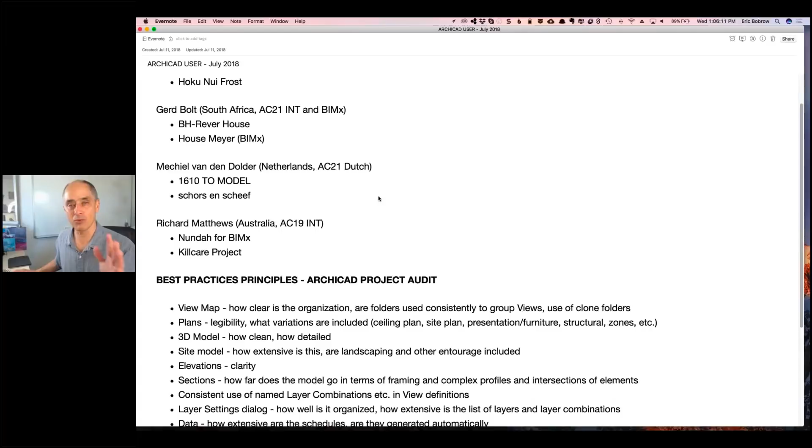Now, as we go through this, and again, I have to just get used to the fact that I'm looking at the camera on one computer because it has a better webcam, but the screen I'm sharing is this other computer here.

So this is just a quick run through of some of the principles that I look for in terms of using ARCHICAD to its best effect. The view map, where you're defining all the different working areas of the project. How clearly is it organized? Are you using folders to consistently group views? Do you use clone folders? Plans, well, that's a very key thing that everyone is looking at, is how legible are they? And to the extent of understanding how far the project has gone, do you have a variety of different views, ceiling plans, site plans, furniture plans, etc. The 3D model, of course, is very interesting to all of us who use ARCHICAD.

How clean is this model? Does it look good? Does it really represent the design well? How detailed is it? Is there a site?

Now, not every project needs a site. Some of them are really in an urban context where you don't need a whole lot of site information. Others, the site is a critical part of the design - it's a very steep hillside. Is there landscaping? Well, it isn't necessary, but it certainly is helpful to understand the context and to help the client participate in the design.

Sometimes the site is also important for getting approvals and showing things to neighborhood groups or for authorities to review.

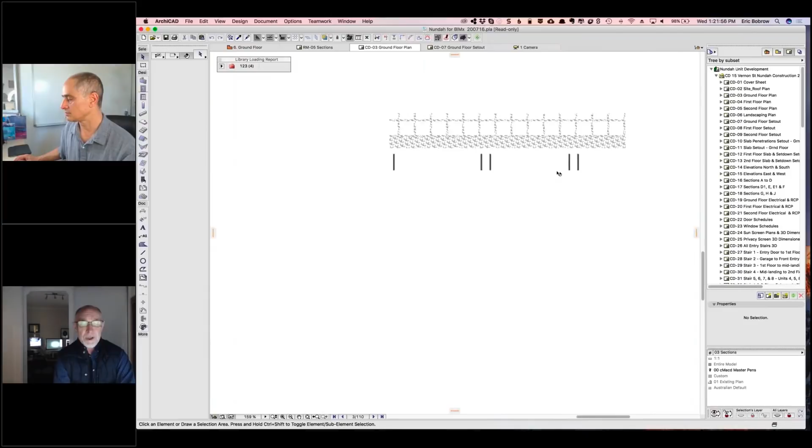This was an interesting project because my developer friend, for whom I do a lot of projects, decided he would like to try to build it with a new system called Ritek, which is a double skinned FC panel strapped together by metal bars, small bars. Those are pre-cut and then core filled on site, dropped into a slot, braced, core filled with concrete. You'll see on that image there, for instance, that there are corner pieces which then lock the walls together.

One of the things I've probably mentioned is I always design and draw in, or produce, color drawings. In this instance, it was very useful because you'll notice there's a legend which shows that different wall types, different thicknesses, will have a different color code. Let's see where that legend is. I'm just going to zoom out.

So the legend, up in this corner here. Quick question - was this legend drawn using the 3D elements just off to the side? Well, of course not, because you don't want those showing up. Those would have been converted to 2D lines and fills, etc. It could even have been a separate worksheet I might have plunked down on the drawings, but that's okay. In this case, I went down to the actual plan, the ground floor. Of course, if you wanted to, you could crop this out when you place it onto the sheet. In this case, it doesn't matter.

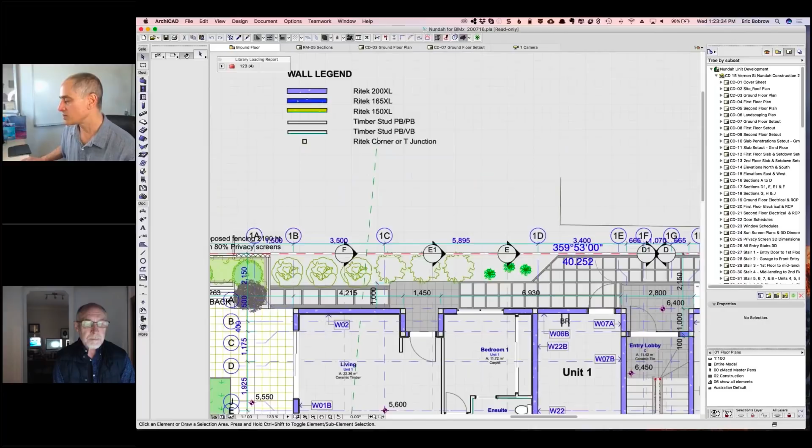Now, as you said, this is a line. This is a group which would, I guess, probably include... so that's the text. Oh, interesting - your text extends over here, but if I hit the tab key, this is a fill. So you basically exploded the wall into just graphics. That's right. Excellent, so this communicates well.

Let's take a look in 3D just so we get a quick sense of that. Now I noticed that you have a folder for 3D views here that are based on camera positions. So one of the nice things about basing views on camera positions is that you can do a fly through, either flying from one to another position, or you can batch process a number of individual camera positions. Now, one limitation is that I don't think you can rename it here in the view map - originally it would come from a particular camera position that's in the project map.

But let's just take a look. So we've got looks like a 3-story building. So this is one of the complications on this site - the fact that we needed to have clearance in that garage for garbage trucks that backed in. In reality, it turns out we didn't really need to have that. So this has got a folded slab, which is another complication we shouldn't really have dealt with when we started dealing with Ritek walls, but that was an interesting exercise to deal with.

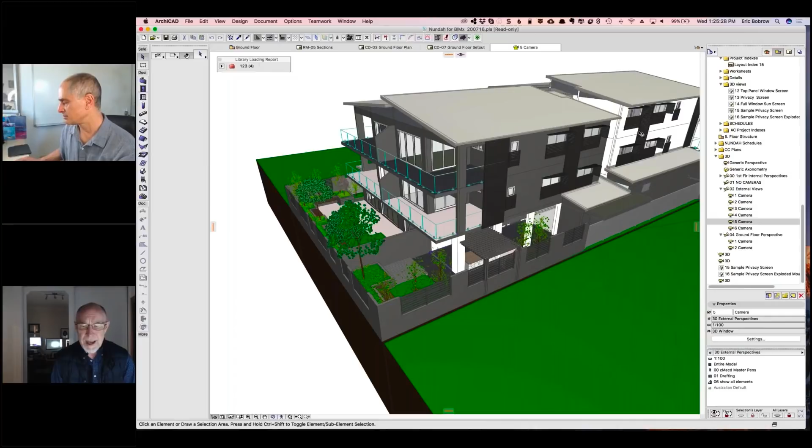What do you mean by a folded slab? Well, if you took a look at one of the sections, the A section probably would be the... Okay, no sorry, it's been a while since I've dealt with this project, so try an E section. So I see some things going on here. Yeah, sorry - G.

Oh, it's interesting - so this one, the last time you opened it, you had it off in a separate window. Do you use 2 screens, or how do you? I've got actually 3 screens. All right, so for my purposes, I'm just going to take this - let's see, go to the window menu and say that I'd like to dock it, so it will then put it back into the tabs here. Just be a little bit easier for my purpose here.

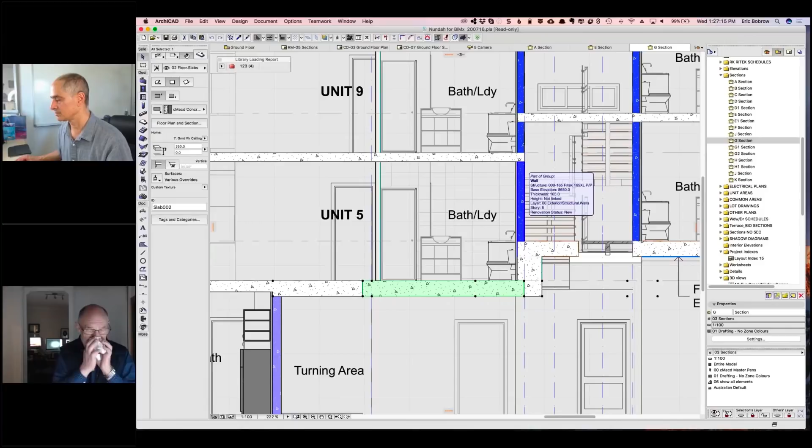All right, so here you're talking about the fact that it's a split level here. Split level, yes. Okay, so you were calling it a folded slab? Well, that's a fairly complicated fold because it's not just straight through - in the section of the entryway it actually wraps around that entryway. So that created the complication of having these walls. You can see the blue walls are different sections, so they all had to be pre-cut and specific sizes. So, fairly complex.

Have you got the... if you go down to, just a second, have you got the Ritek shop drawing review open that I sent you? I'm sorry, where was that? I'm not sure - that was a PDF that I sent through, which would be good if you could open that, because that relates directly to... was that a PDF or what? PDF, yes. Okay, so let me see if I can find that.

So, here we go here. Ritek shop drawing review PDF, which you perhaps - that's the last email I sent this morning. You scroll down, you should... oh, I don't see. Keep going. That's the last one here that I'm seeing. So, right, well it was in the second email I sent you. Okay, Nundah final web zip and Patricia Place Killcare PDF.

So now let's see if you sent it separately. So no, it would have been attached to the file. So I don't see that. All right, so we're going to have to go without that. You mentioned it, but I don't see it attached. You can't share my screen for that. Yeah, we could have you - it might be complicated, don't worry. Okay.

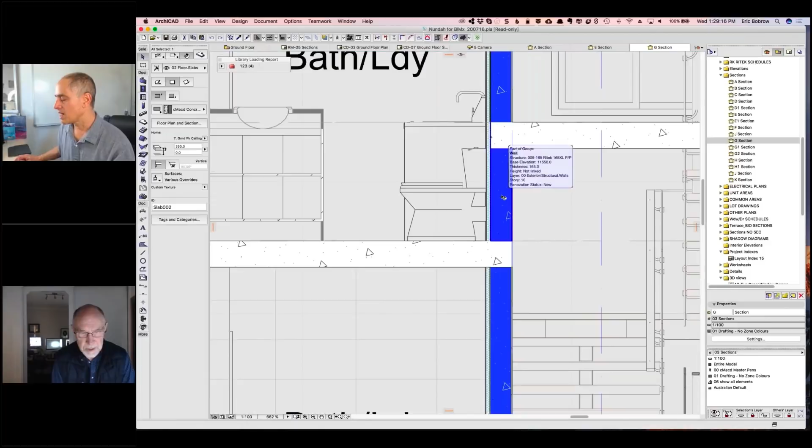Anyways, yes, because all those chunks of wall had to be pre-cut. Some of them couldn't quite match. That's what the PDF shows, how those shapes are. I had to match them all, send them off, and then they check them off.

One question I have structurally here: the slabs are inserted, and visually they're interrupting the verticals there. Is that the way this is actually done, where you have a small piece of wall, and so even though this appears to be a single wall, it's actually made up of two separate pieces? Yes, that's correct. It's set in place, filled up, and then the next slab is poured on top of that.

Okay, interesting. So in terms of design, what was the most interesting part of this project for you? You mentioned some things about working at the split level. What else was interesting in terms of what you had to figure out? Well, it was how to best shape those walls, I guess.

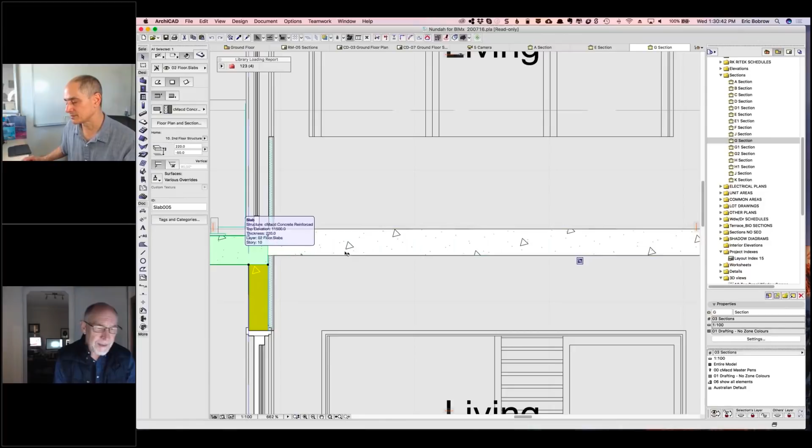Here's another interesting one where we've got just a slight offset there. Yes, and you'll notice some of those walls also - I don't know why that one's not working correctly - but these are composite walls, and in this case you can see how the insulation part of the composite runs up past the end of the slab there.

So all of this was done with SEOs, solid element operations, and I was making sure that all the materials in this are actually represented accurately. Okay, so this 3D model here is quite accurate.

Now I'd like to look at this particular part because, as you mentioned, you did solid element operations, and some of the things you do in solid element operations have to be done that way. Others can be done with just complex intersections, with building materials taking precedence. Let's take a look at this particular area because it's a subtle thing.

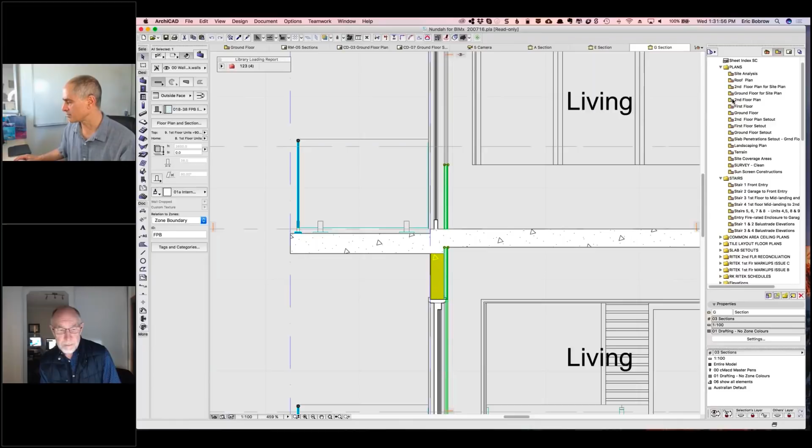And so where would that be on the plan? I want to do a marquee around it. Oh, that's a front, it's a rear. So which story would it be? Which story should I go to for looking at it? Sorry, you want to - well, it doesn't really matter if you're going to do a section. Are you going to do a marquee section?

That's at the rear of the building. All right, so I'll just go down to the first floor here, so there. By the way, there are all those cameras that you defined and are showing up.

So I don't know which is the front and which is the rear. I guess your left-hand side is the rear. Okay, so would it be somewhere in here? I'm trying to see your cursor. Yeah, so if you went above G and went down through H, below H or something, did a marquee. Bold. Yeah. Yep.

All right, so we're going to take a look at just that slice there. All right, so there's exactly what we're seeing in the section. Isn't that great? I'm not being facetious - it's just when people tell me it's too much work to get the sections looking right from the model, I say you just have to understand how to fit pieces together.

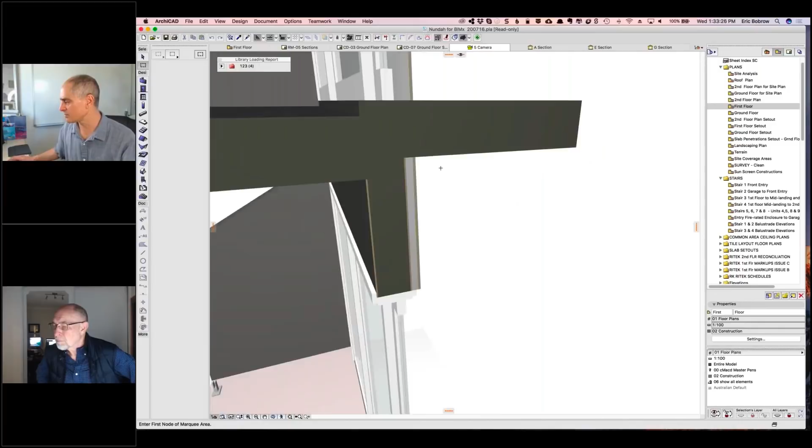So let's change one setting here, which is right now we're seeing the edges all in gray. That's where I'm cutting with the marquee. If I go to the view menu, 3D view options, elements in 3D view, filter and cut elements in 3D - this is sort of non-intuitive in the sense of how would I change that gray. Well, it has to do with how I'm looking at the cut elements in a marquee.

And it says use element attributes here. That's interesting. So why is that gray? Because it should really - well, are we missing the texture? Yeah, probably, that would be it. And in fact, all right.

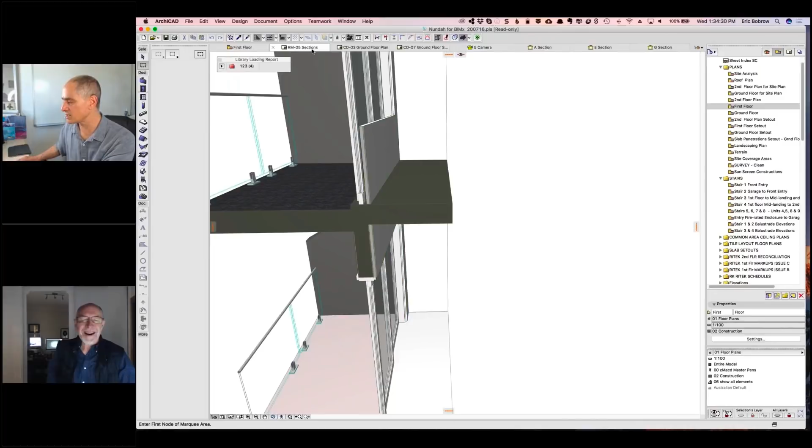Now let's just talk a little bit about this. You've got a piece of it, a wall that's going up. Yeah, I don't know why that's not cutting there, because that's not the way I left it. You must have been messing around with my model, Eric. I haven't messed around with your model, but let's look at that section here. Oh, I remember that - for the section, which one was it? It was the G section here.

Yeah, so in fact, here's... yes, interesting. Okay, so there is a little mistake, or something that went bonkers in your model. Maybe it happened before you sent it, because I haven't been modifying the model.

Well, like I said, this is on an older disk, like a backup disk off on my other server. So I had to make sure I relinked all of the library items, although that shouldn't really make any difference. I always worry a bit when I'm reassigning using the drawing manager all of the linked view maps and PDFs that I use. That could happen in that, although that seems a bit odd because it really shouldn't be cutting it.

Yeah, and it's interesting that all of a sudden it's recalculating this here. Now, the point I was making, aside from the fact that this should have been trimmed off most likely, is that you were doing this in two separate walls. You had the wall, it looks like just the surface with the insulation.

Oh yes, and that is because the RITEK wall needs to be a particular color and identified, but the internals of every wall could be different. So that may be a 150 mil RITEK wall, but the internal surface in that instance is insulated, whereas in another instance it could just be Villaboard on the interior. So you have a different... so yes, I've actually got double walls there.

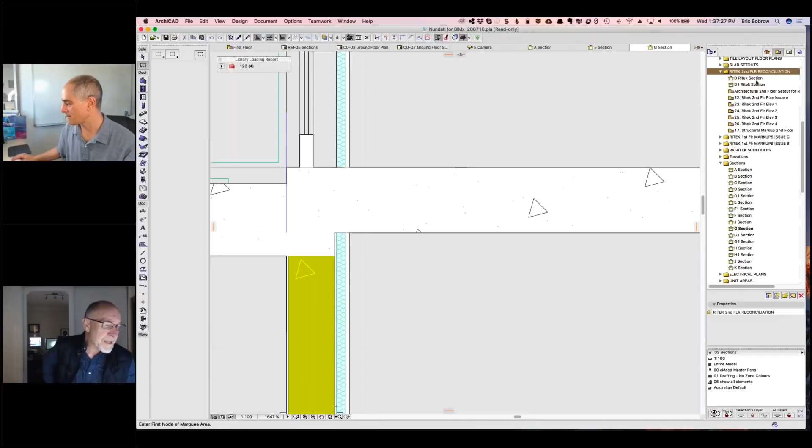Right, okay. So then if you go down to in the view map to RITEK second floor reconciliation, about just past the stairs - well, RITEK first floor markups, second floor reconciliation. Have you got that there in the view maps? Right, second floor reconciliation, all right, there we go. Just go to the D section - which one, the RITEK, D RITEK section. Okay, we'll do that.

Oh, interesting. Well, this is a whole different view, seeing the... so that's cut through the entryway. So you'll notice that all those labels actually label the specific cut of the wall that RITEK would have to supply. Now they don't show there because, of course, being a common material, the joints don't show. I've got somewhere else I might have...

Okay, so here is a piece, and we've got this label F07B, and there it is. So basically, in terms of BIM and data, you have this element with the designation, and the label is coming from that. So if I were to select the label here, when I hovered over it and went to pre-select it, it's indicating that it's attached to that element.

And what is it if I double click on it? Whoops, if I go - yeah, that's really, it's not as sophisticated. I would have done this like Tim Ball does it with the newer versions of ARCHICAD, but we didn't have that function there. So that is, but that is still an ID - okay, so the ID attached to the wall.

Yeah, so just as a point for future reference for everyone, and Rich, you're well aware of this, we can now make labels have automatic referencing to a variety of data from the element. So we can say this label is associated to that element, which Rich already had, but instead of it being just pure text, which then has to be manually coordinated, it can pick up the information from this element.

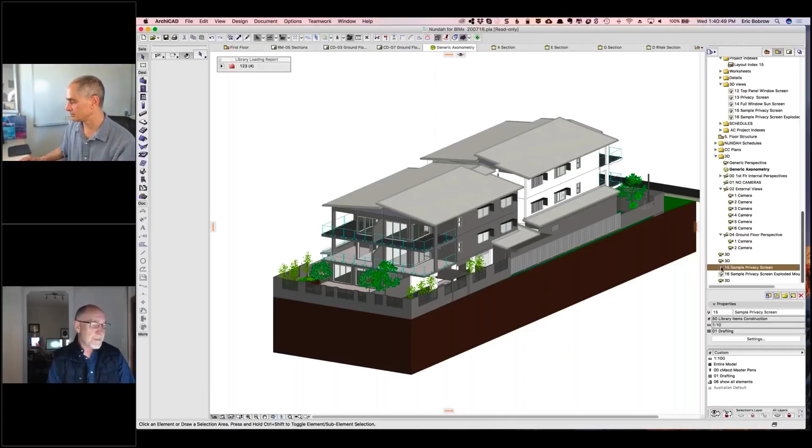Is this what you're referring to here? Well, it'd probably be better if we went to the layout, about halfway down, CD24. Wait, layout... CD24. Okay, CD24, yeah.

So these are custom sunscreens, the actual profiles for the edges and the pieces that go in there. So that's how I laid those up, so they're actually 3D.

So if I open the source view, let's take a look. This is a source view. If I select any element, it's a slab here. Now, for those of you less familiar with this part of ARCHICAD, we are in a view that's based on the 3D - it's called a 3D document view. That means we can put in text and labels in here, but these elements came directly from the model.

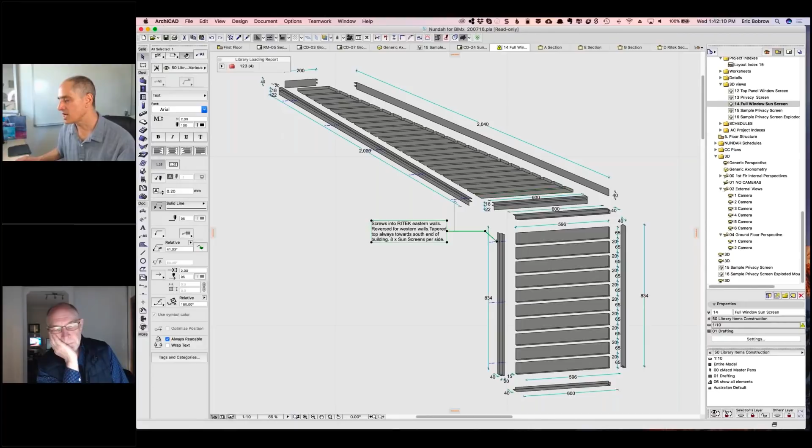Now this is a view where we can say open the 3D source, because right now we can't rotate around - we can only zoom in and out and possibly annotate it. If I say open 3D source, now we're in a live 3D view which has those elements.

And of course, you've set it up with a particular layer combination - is that what you did to isolate it? I would have done it, yes. Can't remember now, but I always, when I create my library parts, I have them on a library part layer. But this probably I would have had specifically, because I don't want this showing up in the rest of the drawing, so those library parts are switched off. In this instance I probably had a special layer for grouping these.

So I can see that in terms of your layer structure, you've got a layer combination that's active: library items construction. That turns off almost everything except for a few special layers at the bottom. So basically you're isolating your work at that particular time when you want to construct library parts, or in this case, annotate a special view with this layer combination.

And while you're there, it's worth mentioning my layering system, which started way back when - I particularly like it because it groups everything. It's a redundant system in that all the fills are together, all the lines are together, markers, etc. One thing that used to really bug me was that walls were usually at the bottom of the list, and in the old days your scrolling was pretty slow, so you always had to go to the bottom. Or if you said exterior walls, interior walls, they weren't necessarily next to each other in the list.

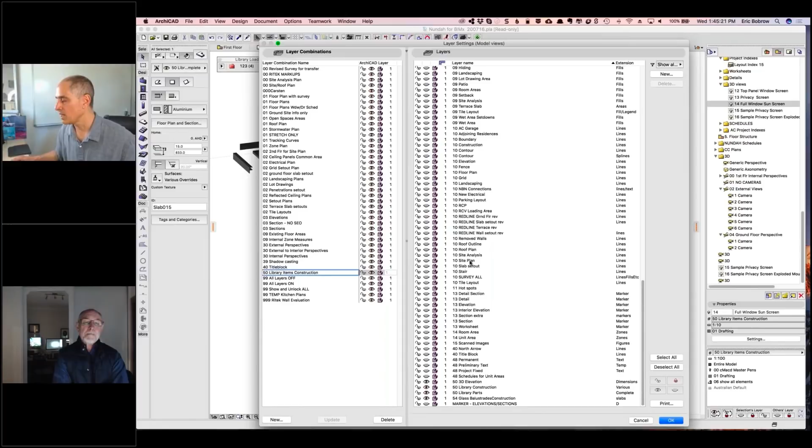I'll just point this out as a general comment. One thing I like is that you've thought this through for your needs, rather than just accepting what Graphisoft does out of the box. You've got things that relate to actual plans, like floor plans or electrical plans, but also things like library items construction and temporary kitchen plan. You're using this flexibly and deliberately to organize things and know where they are. I like that you've grouped the walls, slabs, etc. in a sensible order, with the annotation in a separate area.

Now, when I click on something like floor plans here, I'm seeing that things like stairs and objects, electrical things are turned off. Now, you don't have them locked. Are you aware that if you lock the layers that are hidden, you can hide them from the list?

Well, probably I hadn't thought about that, Eric. Okay, that's probably a good point.

I guess sometimes, though, you might be in the floor plans, but want to have a quick look at the electrical. Then I just go in and switch it on temporarily, so if I go in and out I don't have to worry about it. Because of my organization, I can quickly go to some place. I usually lock the boundary lines and a few other things that should stay locked that I don't want ever shifted. But if I'm in the drawing and select an individual element to change its layer, I want to make sure that layer is available. So I tend not to lock them and make them disappear, because that can be an issue.

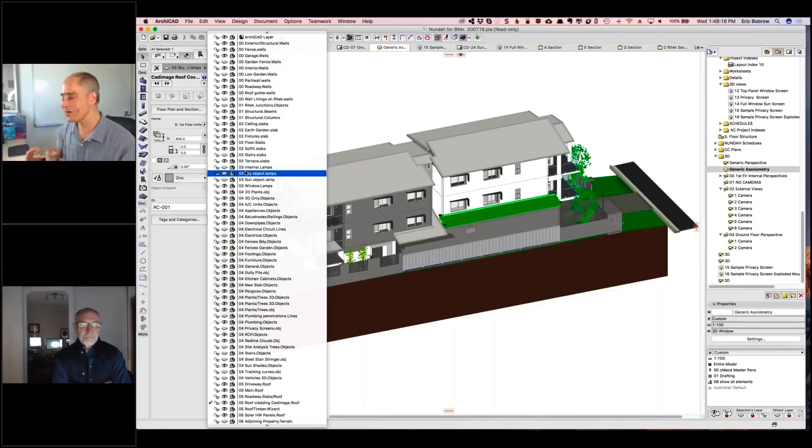There should be a... no. There's actually an entry in the view map. There's a stair folder, so we're in the view map. I think it's higher up - stair. Okay, so look at stair. So if we select it, we've got a slab here.

We've got a supporting piece that's also made with the slab tool, trimmed to this, and this element here is the center. It's interesting - I selected it and it's a slab. How did you get a slab that goes like this?

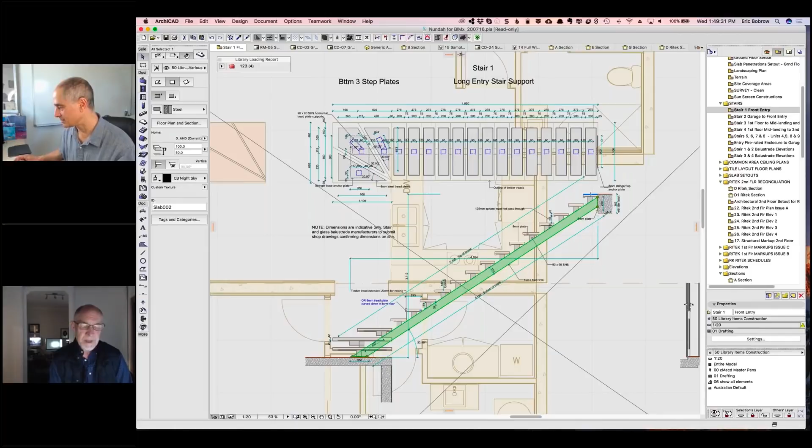Well, you've got to be clever. No, you're actually looking at how all of this is constructed lying down. So you're drawing essentially the profile of all these elements perpendicular to the floor plan, and then you save this as a library part, or turn it into a morph - what do you do? I look at it as an elevation from the top, and that converts it into the correct orientation.

So for instance, if I look at this here - I'm going to do this because this is an interesting approach. All right, so this is what we were looking at, and this element here is a slab. Why is that? Because this is just lying on its side, like a tilt-up type of process. Interesting.

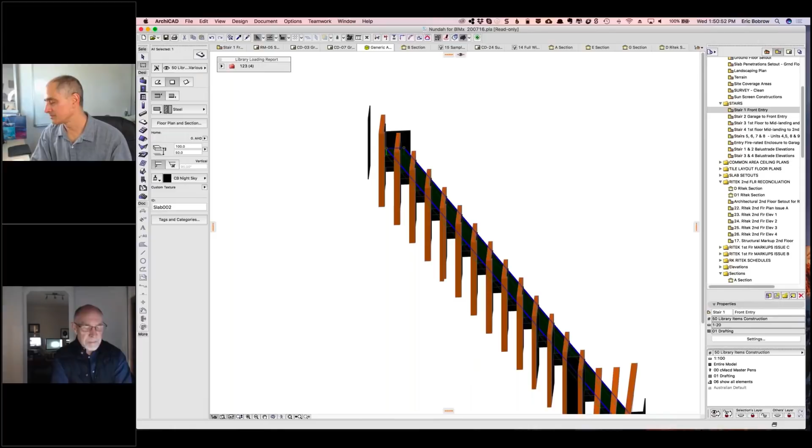So that's an interesting way to do it - you combine all of these and save them as a library part, rotated. If you imagine that first view as being a floor plan, you look at the north elevation - that's what I look at when I ask it to go to 3D. Then I save that as a library part, and all those parts and pieces are in their correct position. It's a lot easier working with that, particularly when you're looking at slopes, than trying to work in a real true 3D sense, because you can very accurately lay everything out.

Todd Hotchkiss asks where the project is located, and if it's in a hot climate. It is - it's in Brisbane, in Queensland. So hence you'll see the extra insulation. ARCHICAD gives a certain value, but because it's concrete FC paneling...

Can you go to the layout and do the cover shot? I'd just like to see - that's probably a better cover sheet.

No, that's not - I do have a final photograph of that, but that just shows the textures a bit better though. I tend not to get too...

It depends on the project, but this project has been finished and looks pretty good in reality.

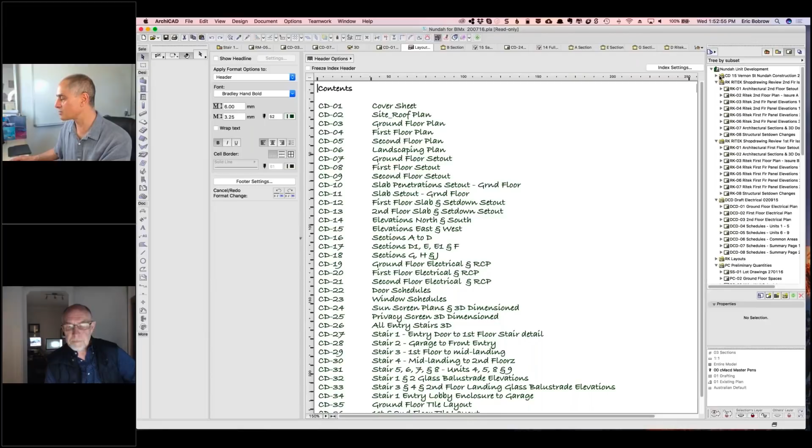Now a quick question - this drawing is your list of sheets, so that's an index? If I open that up, is this an index? Okay, which is perfect. So basically that's a list, and you're saying the subset is this particular one, as opposed to having more sheets in here. So this is the CD set - you're not including the RITEK set, etc. Not including the RITEK and the draft and all the rest yet.

Okay, just so that is of interest for those of you watching - you can have indexes that list different groups of drawings, like just your structural drawings, or you can have them list the entire layout book. But if you want to be specific, you can choose one or more subsets and say, I only want to list those particular sets.

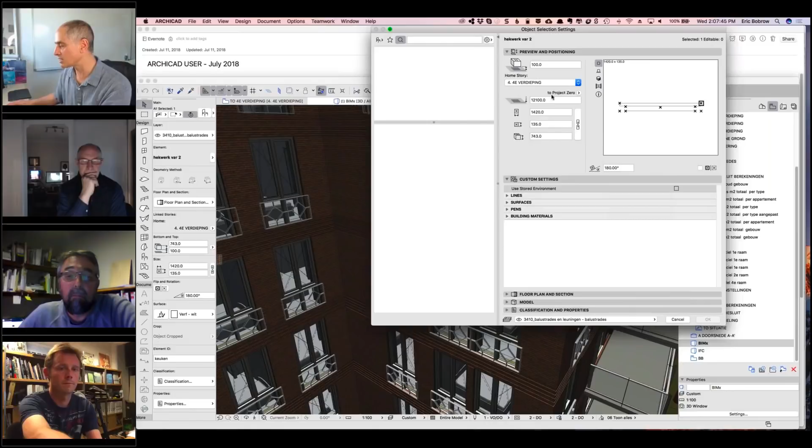So I'm going to ask - did you create this with just some slabs that you drew, or thin walls on the floor plan? How did you create that? That's one quick question there.

Now if I select the wall here - this is an interesting thing, I'm just looking at it structurally. The wall we can see has all of these bump outs. If I go in and say edit selected composite or profile, we can see that it is a complex profile, and it does have all of this shape here. So we have these individual components that are uniform down here, and then we have the detail there - that's just interesting to see how that's being done in terms of level of detail.

Going to look now. Dave says maybe the microphone is plugged in wrong.

One thing, Mechiel - you had mentioned that you had a computer with a microphone or webcam separate from your normal working computer where you could have the project open. Do you happen to have a microphone on that other computer even though you don't have a webcam? If that's the case, you could potentially connect up on the other computer using the same link.

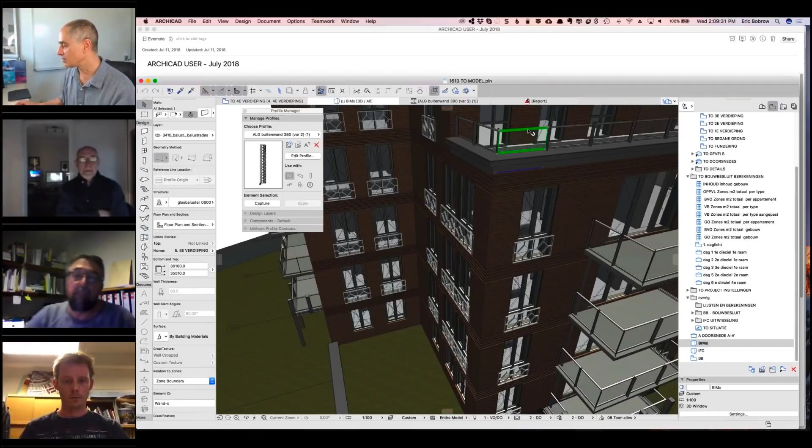All right, but I'm looking here - so what is this element? This element that we're looking at, in terms of the railing, is a wall. Let's just see what this is - it is a complex profile, made of, I presume, some metal and some glass. Just in terms of looking at how things are being constructed.

Now here's an interesting thing just in terms of the modeling. We have what looks like - and I'll just zoom out a little bit.

Certainly it looks like a slab, but it's actually a piece of wall wrapped around here. So you're doing a lot of things with complex profiles, which is great to see.

So we can see, I just heard something. Was that maybe Richard? No, I'm sorry, I coughed. Okay.

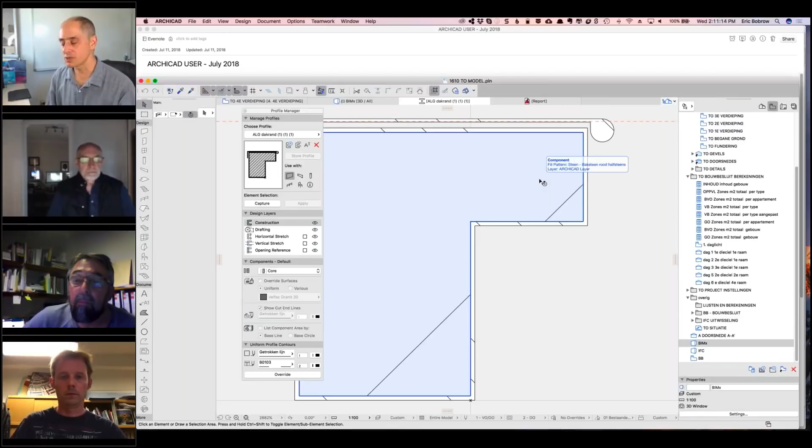So Mechiel, I'm not hearing anything there. It's interesting, I'm seeing it indicate that you're talking, but there must be something going on. Whenever you're typing, I'm seeing something. This is very odd because it shows on my screen that you're talking, Mechiel, but I can't hear anything. It's like your microphone is defective, but I don't know what it is. All right, so we'll just look at a few more things. Perhaps we can have you on another session where we can work out the technical details ahead of time.

So the main thing I'm finding interesting just at first glance at your project, and really it is just limited to what jumps out at me, is your creative use of complex profiles here.

So we've got this entire piece here that wraps around, and it's actually got a gap in there. I'm not sure how that is actually constructed with the gap. But if we go back to that 3D view and zoom in on it, so we can see the shape.

Now it's interesting and nice that ARCHICAD is actually cleaning these two up nicely, and it's interesting that instead of making a diagonal, it's actually sort of chopping this out, and yet we are getting a nice clean edge. There is a little bit of a line there.

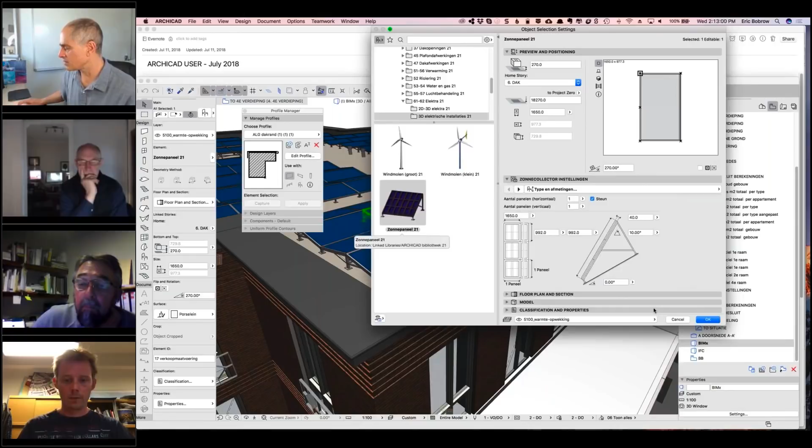Let's just see if there's anything else that jumps out from a modeling perspective. So we have some, I presume these are solar panels on the roof, and this is an object that we can see in 3D if we look here. Okay, so this is a standard library part, or a sophisticated library part, that you're putting in. So you're using a standard part and of course arraying it.

That's good. Let's just take a look at your layout book here. And by the way, Nathaniel asks, is Mechiel muted by the operator?

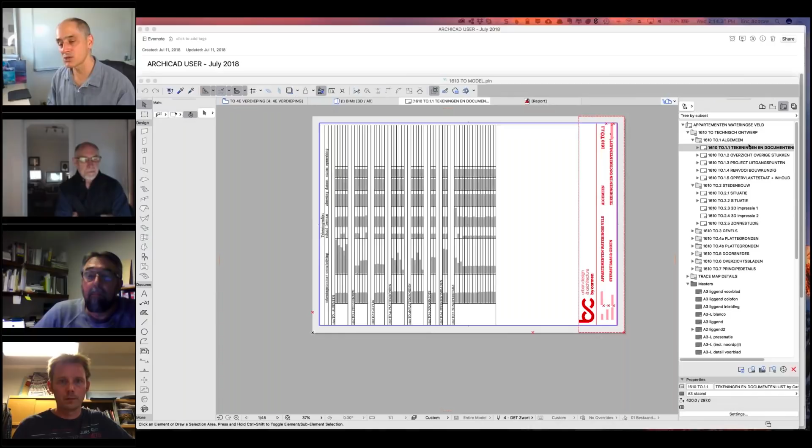No, I am not. I can mute people, but in this case their microphone is showing as active. Don is asking, is the recording computer controlling the volume? No, I didn't do anything separately there. Dwayne says, I see that attendee 24 is talking, but not hearing anything either. Vic says, try muting Richard to see. I will do that, but I don't think that's going to make a difference. All right, so Richard is now muted. Mechiel, go ahead and try talking. Yeah, it's not coming through. So, all right, all of the guesses, I appreciate you all attempting to help, but unfortunately they're not working. And I do keep hearing little blips, like there was a defective microphone there. That's all I can guess at.

All right, so if I go in here, what are we looking at on this page here? Oh, this is interesting. So now this is sideways. Are you printing out your sheets differently? Okay, so we do have some sheets that are one orientation, some that are a different one.

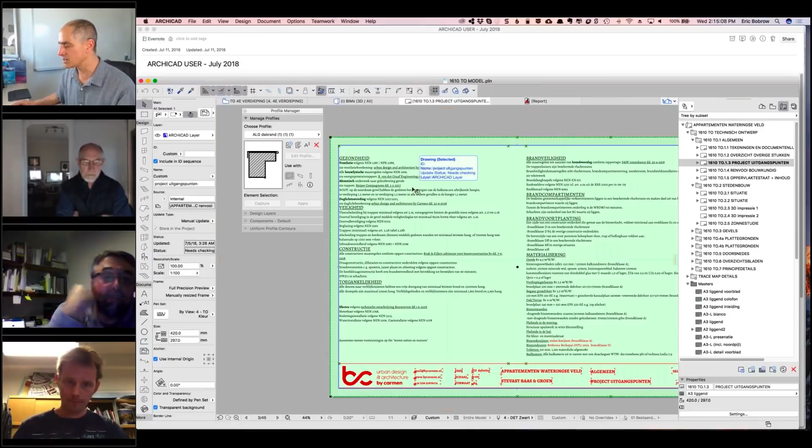Now, I'm always interested in seeing, so this is a drawing on a sheet. And when I open the source view, how much is it manual versus anything else? If I select this, this is just some plain text. So you've got this here, a block of text.

Now it's interesting, we've got all of these guidelines. Let me just remove all guidelines there. That cleans up our view. But I can see that each one of these is a plain text element. Now there's nothing wrong with that at all, but it is certainly possible that these could be put together, even though they're different formats. One of the things I know in the past with ARCHICAD, for people who came from a long time ago, is that you might have to put things in different blocks in order to get different formatting. Or if this was coming from another program and you're copying and pasting, it might come in different pieces. But right now, I don't quite see why these are separated.

Let's just look at a couple other things. I'm going to jump to the next group of views here. Okay, so we do have site information. The question is, this is a drawing—if I open the source view, what are we seeing?

So we are on a plan view. We're seeing the building with a simplified view, which makes sense because it's reduced in size. That's done by the model view options here. So we have a model view for a site at 1 to 500 scale, which would be, in the US, about 1 inch equals 40 feet or so.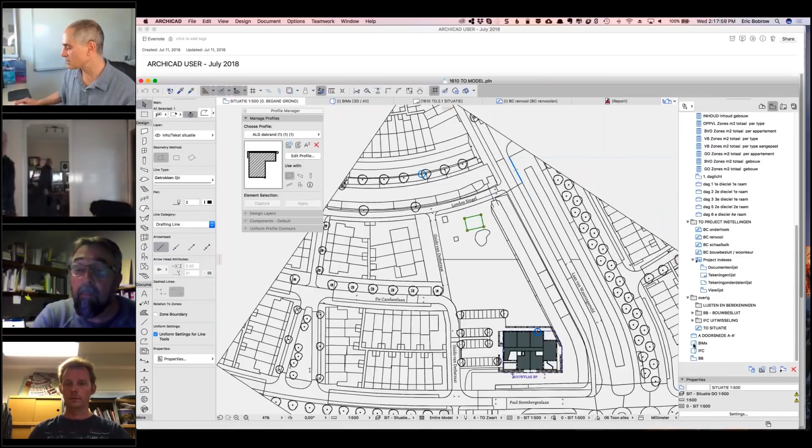If we go back to that BIMX view, so we are seeing then—I'm just waiting for it to refresh—so we're seeing a very simplified site here, whereas on the sheet we've got a lot more data.

So one thing I'll ask you, Mechiel, is did you consider doing any more context in the site in 3D, or was it really just not necessary? This was just the only thing that was necessary was the 2D information—pure text, so DWG, things that came from DWG, and just 2D.

All right, so now I know where you've been typing, because it's not showing up in the questions area, it's showing up in the chat section. All right, so I think probably we'll call it here, unless there's something else you think would be particularly of interest to our viewers.

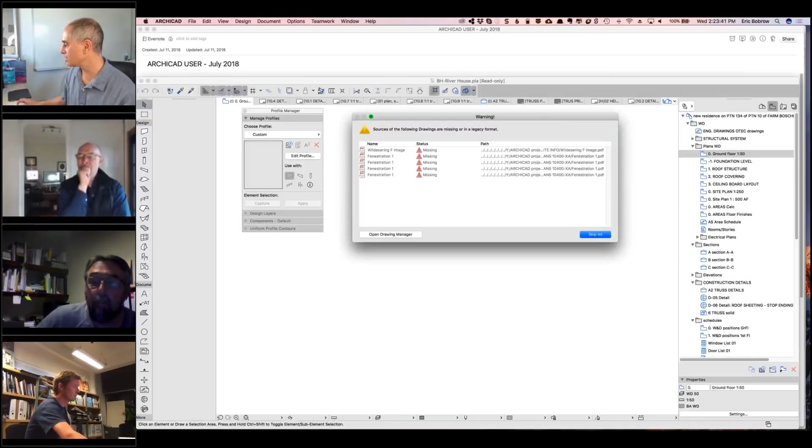All right, so Eric Lutz says 22 is working well. Ken Andrews says, I've started with 22 and it seems very good so far. Some people are saying not yet. Gerald Hoffman seems to be quite good. Bob Schwenke says, I've jumped on it immediately, having some issues with old versions of ARCHICAD. I'm not sure what you mean - trying to open old files with old versions, or you're talking about old files. And Joe says, we don't have 22 in New Zealand yet. Okay, all right, let's skip this here.

I'm going to bring up - Gerd did write some extensive notes in the email, so we can at least refer to them in terms of just knowing about the project here.

The project is off-grid, energy efficient, and constructed within the guidelines of a UNESCO biosphere-controlled natural environment. It floats above the dense bush - he's in South Africa. It overlooks a savanna area and a small stream, hence it's called the River House. The owner is also the first-time contractor and has a small, low-skilled workforce, and BIMX has been a morale boost among the local workforce - they can see and manipulate the views of just about everything they're building, so that's really helped.

Project notes, which you sent separately, have some interesting descriptions of the structure. The model is complete, the layout book has everything, and the BIMX hypermodel is also included. You're working on your own in South Africa - you're sort of in a somewhat isolated, lonely mission here.

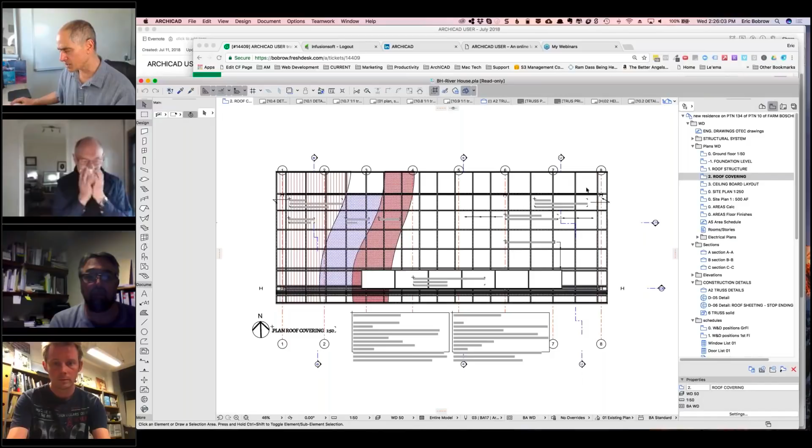So let's take a look then at the River House, and some missing parts, I think - favorites. So we are missing a couple of little things, I think we can probably just ignore that. And if we go up from one story to another, we can see you've got stories here: foundation level, roof structure. So it looks like you're separating out different stories for different uses, say for roofs - obviously this isn't a story per se, it's just a level or organization that can have some issues there.

Ceiling board layout - but maybe, of course, this might just be one level. Let's just take a look in 3D so we can understand this. So in terms of general BIM organization or ARCHICAD organization, I just zoomed out to fit in window here. Or when we have these views here, this is something, a suggestion for Gerd and for others.

You can go in and rename them. So in other words, if I double click on this view, it was a close-up, so I could just call this close-up of front. I don't know where it is, whether it's a front or not, but now it's easier to know what's the difference between that and this 3D view, which is a perspective from ground level.

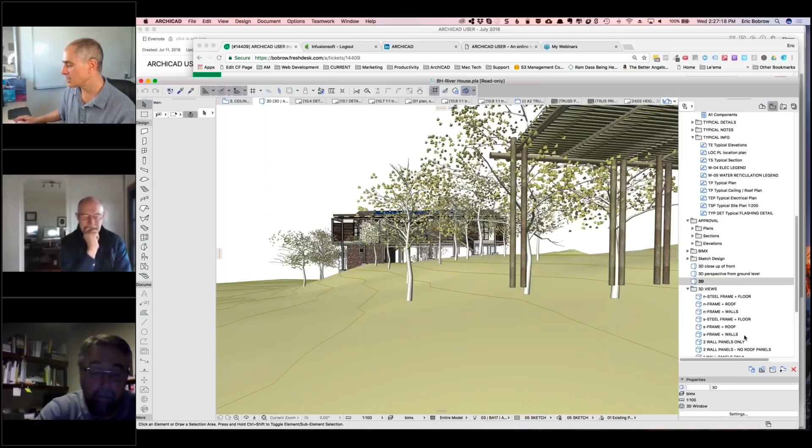So that's something I would recommend that you do so that you know what they are. Now, it looks like you have some other ones here that do have some names, so maybe you were doing it here, but these were just some working views, I don't know. But in general, what I would do - let's look at some of the other things about this structure.

So here's very interesting, is that you're using this to communicate the construction. And you mentioned this in terms of the BIMX, but obviously you're helping the inexperienced workforce and contractor to sequence the construction. Is that right, Gerd?

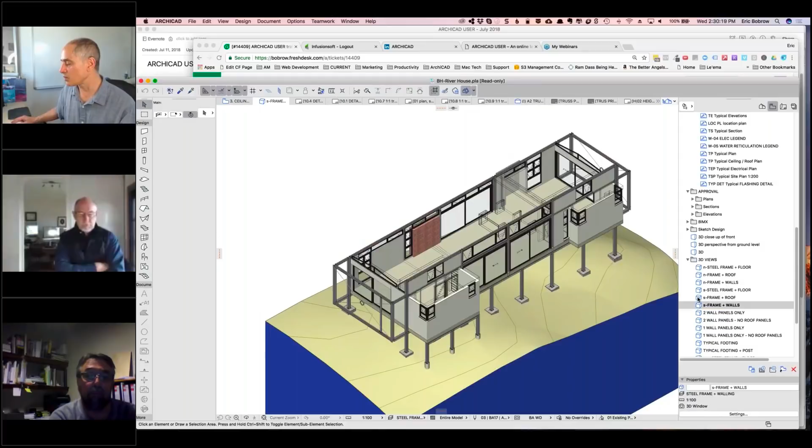This would obviously have a different layer combination. What I like here, that's very clearly organized, is you have a prefix for direction, N and S for north and south, and multiple variations so it's easy to understand what's going on and their relationship.

And now you have wall panels only. Let's just see, are these, in terms of panels, okay, so this is a panelized structure, I'm guessing from the way you refer to it as a panel. Now this is interesting. We have a lower wall and we have this upper one. I'm wondering, maybe you can type in, why this wasn't done as a single wall. Is this fabricated separately and sits on top here?

So let's see, you use both, and I'm not quite sure, or you use both, probably stories and layers combinations. Okay, so Eric Lutz says, show his story setup, please.

Okay, let's do that. So if I go to story settings, by the way, this is one way you can get to story settings. You can also do it from the document or design menu here. All right, so we are seeing ground level to roof structure 2890, and then to roof covering going up here. So actually, each one of these stories has a significant gap of 3 meters, here 10 feet roughly.

So why was I confused? What was I going on about roof structure? Oh, you know what, I apologize, I misinterpreted this. I was looking at your numbering: 1, roof structure. So I'm just going to go back to the plan. 2, roof covering. All right, I was interpreting these, because of the numbers, as separate stories. But now I get it, that this particular roof covering is from the 2 roof covering story, and the roof structure. Oh no, these are separate stories. They are separate stories. So I'm a little confused, but that's all right, I can't expect to understand it perfectly.

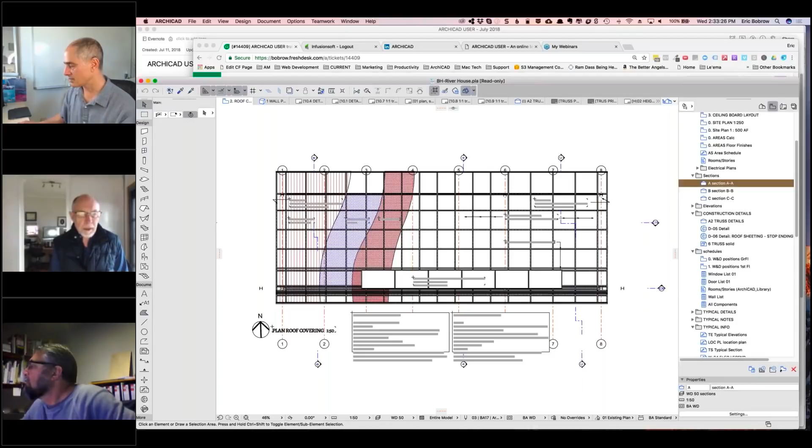Eric, can I? Yeah, go ahead, Rich. You mentioned the separate bit of wall sitting on top of the other wall. One of the problems you get if you put a wall that extends up higher than the walls around it and join it with another wall, is you often don't get a nice clean intersection at a corner. So one of the reasons I have a separate wall at basically an upper level for gables, where you have split levels of walls, is to try to get those corners reacting nicely. Otherwise, if you have another wall up higher joining in with that, it doesn't clean it up properly.

Well, that sounds like a reason to isolate in some cases. There may be some ways, in terms of junction order or other settings, that might allow it to be done more as a full wall. ARCHICAD gradually is getting better at doing all this together, so I would at least keep exploring it. But your point is well taken.

Now I see Gerd says panels are modular, 600 by 2400. So that would be 600 millimeters, about 2 feet by 8 feet. Can be fixed horizontal or vertical. Offcuts are used in various ways to minimize waste. Okay, that makes a lot of sense. So if they are 600 by 2400, then when you have a normal wall for a room, would you be stacking them horizontally on top of each other? Is that the way it would work, Gerd?

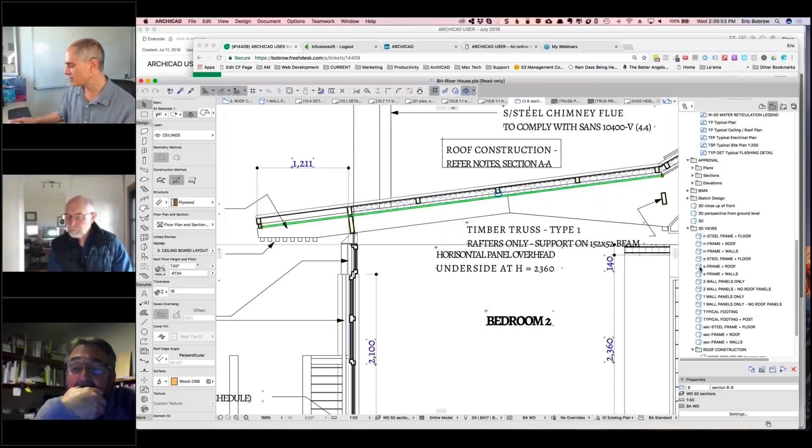Okay, Gerd says some, not all of the modular panels have been placed as separate elements in discussion with client and contractor. All right, so in terms of the framing you've got here for the roof supports, that we would see in this 3D view here.

So we've got, oh, here's an interesting shape. This is an object that is - okay, so it's just an angular piece. I was thinking it had some more complex shape. So what is this? This is one object that does have a more complex form.

Okay, so it looks like this is something that you fabricated yourself. So this would be just an interesting thing. Did you draw this, much like we saw with Rich, just horizontally on plan, and then save it as an object that was rotated?

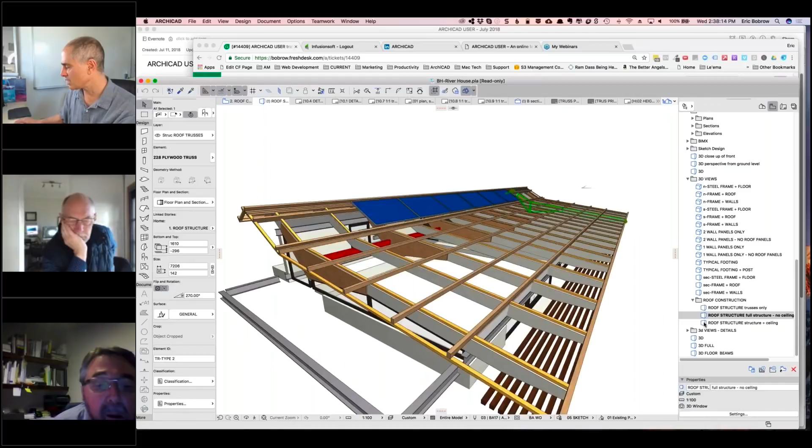Okay, so Gerd had said a minute ago, have a look under 3D views, roof construction, to bottom of the views. All right, so here's roof construction. Okay, roof structure, trusses only. Okay, there we go. And roof structure, full structure, no ceiling here. Okay, and structure plus ceiling.

Okay, all right, let's see what other comments. Well, so my question right now is these elements here that have a number of pieces here. Did you model that lying down on the floor plan and then turn it into an object and rotate it, or how did you create that?

Okay, so Gerd writes, trusses are modeled and rotated. Okay, all right. Well, Gerd -

It's interesting. We'll just take one more overview of the 3D here. So the comment from Dan Wyckoff was that it looks in the vein of Glenn Murcutt - was the building purposely built thin to allow for passive cooling? So it might comment there.

Comment from Geraldar saying nice and clear model. FDVD Veen says, I like the clarity of the components. And Constantino says, beautiful plans, well structured and organized, thumbs up. So definitely getting some approvals and appreciation from people.

Well, here's an interesting little thing - always catches my eye when we have 3D elements. What is going on? Why can't I zoom in? Don't know what's - want to zoom in on this? Okay, for some reason it's not... things are slow. Oh, there, now we can go in.

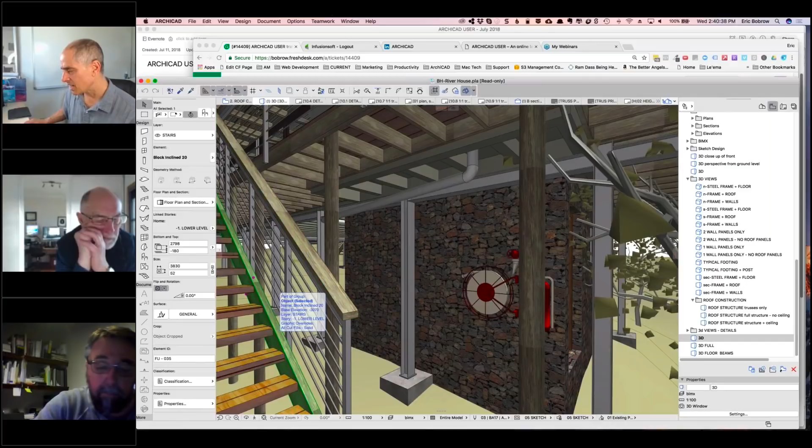So here we have stairs. This is a beam. And let's just take a look at your stair. So this is actually a slab, and this one is an inclined block. Okay, so you modeled this particular staircase with just a bunch of pieces, which is fine. Whoops, I wanted to get just one of the railing pieces here.

Okay, so this is a combined balustrading, rail, parallel bars. Okay, so you made it out of a bunch of pieces. Have you done much work with the stair tool in version 21? Would be one question, Gerd.

Gerd says climate considerations are paramount. That was an answer to the building design question. Constructability and communicating various elements and methods is critical, and the stair was done before the new stair tool was added. Certainly it looks like something the new stair tool could handle pretty gracefully, probably with more finesse than earlier stair options, like having the tread broken up into two pieces. I don't think that was a built-in option previously, but now you could easily define a tread with that profile.

Okay, Gerd, I think we'll move on. More comments, nice work from Dean Johnston. Hey Dean, we'll get onto you now.

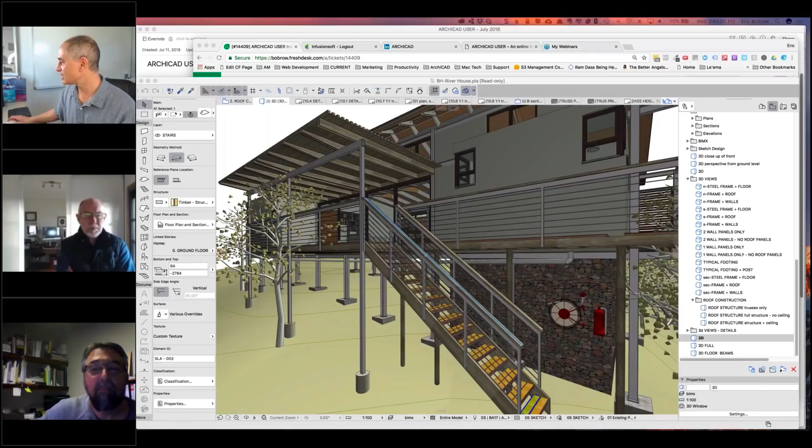So let me go here and say, Dean Johnston here. Eric. Dean. Aloha, aloha. I'm hiding behind the third screen, no camera. All right, well that's fine.

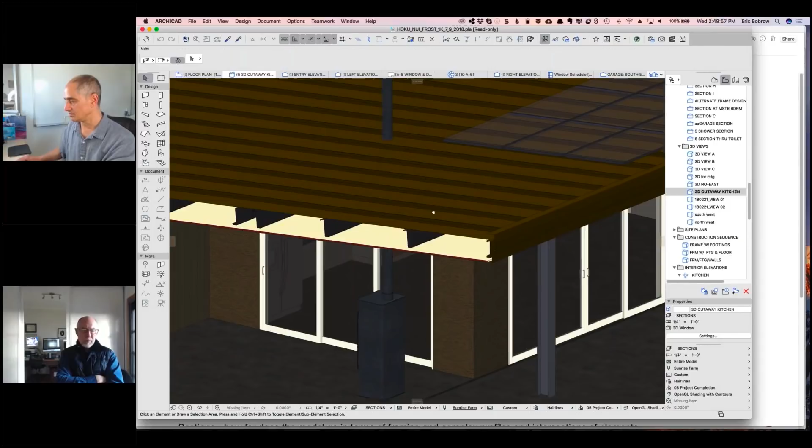This is unique for me because the clients are in a really rainy, windy spot, and they like the idea of metal buildings. So they build a metal frame, put a roof on it, then pour the slabs and infill with the walls, so the builders could have gentler weather for the construction process.

We looked at a number of different systems. I was promoting SIPs for a while for roof and even wall structure, but being out here in Hawaii, it's too unfamiliar a turf. So these walls are framed conventionally with 2x, though we may end up with light gauge metal framing. It's still in the bid process.

So you're using standard composites, just 2x. Actually, it's not a composite wall, it's just a wall. Okay, it is a composite wall because it has multiple skins. It's not a complex profile, so it's uniform from top to bottom with skins, which is sensible for this.

We have a fireplace, this is actually a built-in object here. So I'm just looking at the 3D element—we have an object that is ZEE Beams 21, and that object, well, it's a long piece so it's a little hard to visualize. It is parametric here. Where is this particular object? This is actually in the standard ARCHICAD library 21, in structural steel framing and metals.

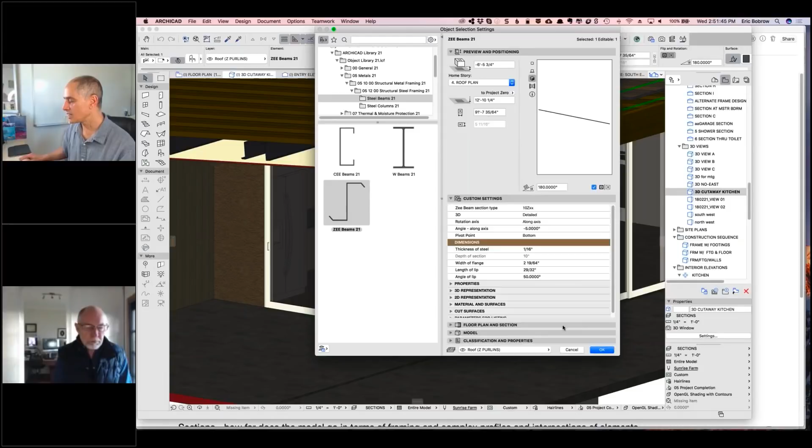I haven't been looking at that, and it looks like they've added some interesting options there. So you used a standard library part, just set up certain dimensions that gave you what you needed. If we zoom in on this a bit, we can see the shape as it goes around, and in terms of the roof surface, this is a roof surfacer object.

So for those of you who are a little unfamiliar with that, if you draw an element like a roof, a wall, or a slab, you can use what's called accessories within ARCHICAD's goodies. These are things you can download for free from Graphisoft's website. If you go to the help menu, it may be called ARCHICAD goodies, ARCHICAD downloads, or in this case here in the US, it's ARCA Plus downloads.

The accessories will basically take an element like a roof and let you make another object that knows the shape of the roof, knows the angle of the roof, knows the perimeter of the roof, and does something on top of it or beside it. So in this case, the roof surfacer has certain rules for whether it's standing seam or some type of tile, etc. This preview and image will adjust based on the roof.

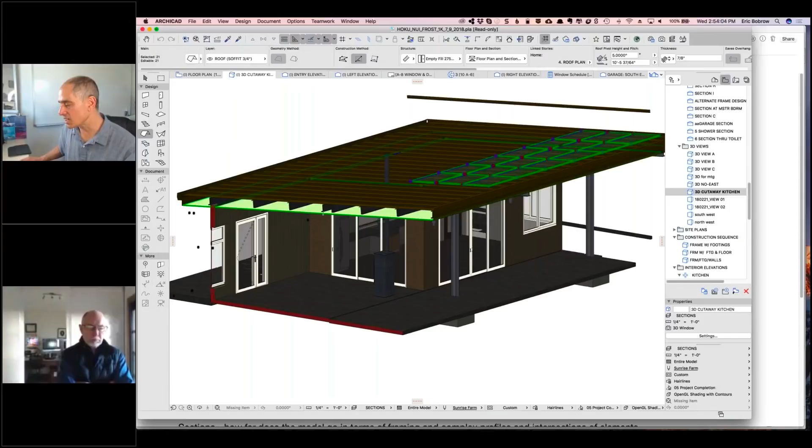Okay, so in terms of roofs, I just selected all roofs. We can see the ceiling is done as a roof, and then these up here are solar panels, done with just roof elements as a quick way of doing that.

Okay, perfect. So tell us what's interesting about this project. Are there some other 3D views that show context? If you go to, now I'm not in it, sorry. Let's see, there's construction sequence. If you just go to that, it'll be a little bit similar to what Gerd just showed.

Yeah, essentially this is what we're starting with: the frame, the footings in the frame, and then the roof would go on. But in this case, for clarity to the contractors, I wanted them to see we're going to do the slabs after the roof is on as flat work. So that's the structural sequence.

Now, what I found challenging and interesting was because this is based on a commercial steel building with their own eave, rake, and gutter flashings, I had PDFs of those profiles, and I was able to make the profiles for the gutters and the rake eaves using the profiler. But the challenge on the horizontal runs wasn't a problem; for the rakes, I really struggled with that. I made them out of a profiler, I think, and then turned them into a morph, which I could angle.

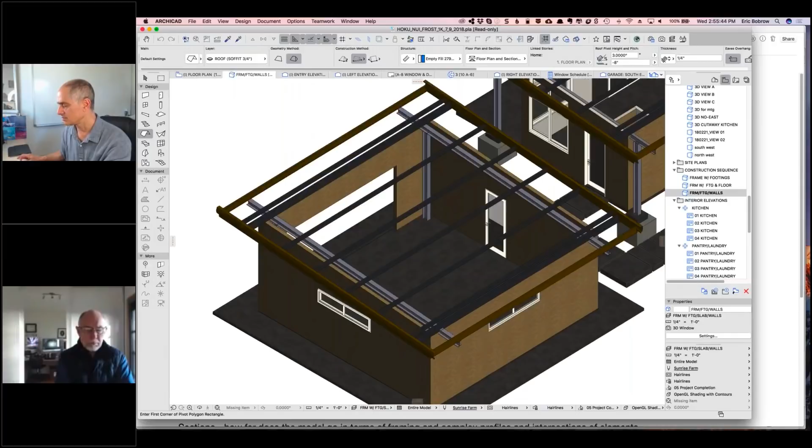Couldn't he do it with a beam by doing a profile beam? Because you can angle the beam. Is that what you're talking about? Well, I don't know how to do that. I tried to create... this was what I was able to come to.

And it's semi okay. All right, so let's look at this then. This shows the horizontal ridge flashing. That's kind of proper, it's two pieces actually, an over flashing and an under flashing. If we look at a section, you can see the two components. But yeah, that's kind of what I'm faced with, a funky corner.

And for the purposes of my client, this is okay for right now. But let's just see if we have the option here for white model. There, okay, so now it's a little bit easier. By the way, I'm changing the 3D viewing style here to attempt to give different clarity. So with the white model, in this case, it's a little bit easier to see just this particular issue going on.

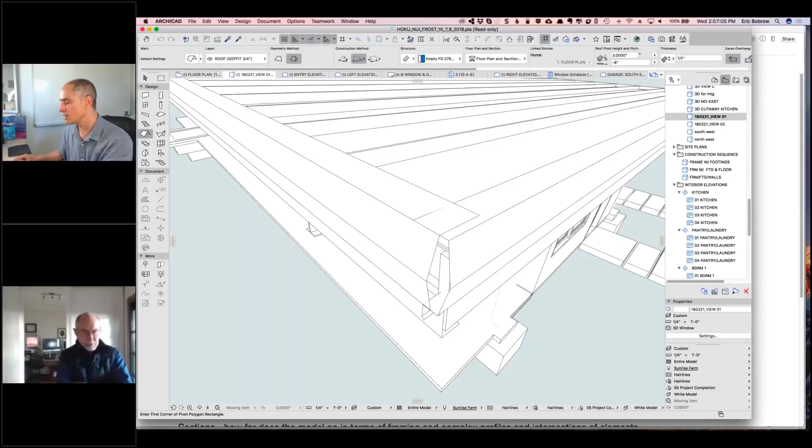All right, so if we look at this, this is a morph, and this is the object. The one that is a morph, you created originally with the profiler to an object, and then the object I couldn't rotate to the rake angle of 5 degrees. So I changed that to a morph, and then in the section I could rotate the morph to 5 degrees. But the problem with the morph is I can't change the length. So that's a little frustrating.

Okay, so in terms of changing the length of a morph, you should be able to do it. It's tricky in terms of manipulation, but let's just see, and this may be useful as a technique. I've got this selected, and let's say I didn't need to see any of the other context—I just want to lengthen this, change it in some way. So one thing I can do is use the option that says show just what's selected in 3D. This isolates that element, and later I can go back and say show all in 3D, and it'll be there. So now I've got this morph.

Now how can I edit the morph? If I go to the morph tool, deselect it. Actually, if I go to the arrow tool and switch to sub-selection, this is available only when you're trying to select morphs. If you click using this sub-selection icon on a wall, it'll say there's nothing there that I can select. But here I can select the line, another line—and no, I ended up grabbing the wrong one, but I can just shift click to deselect that. And then take this one, and this one. All right, so these are all edges.

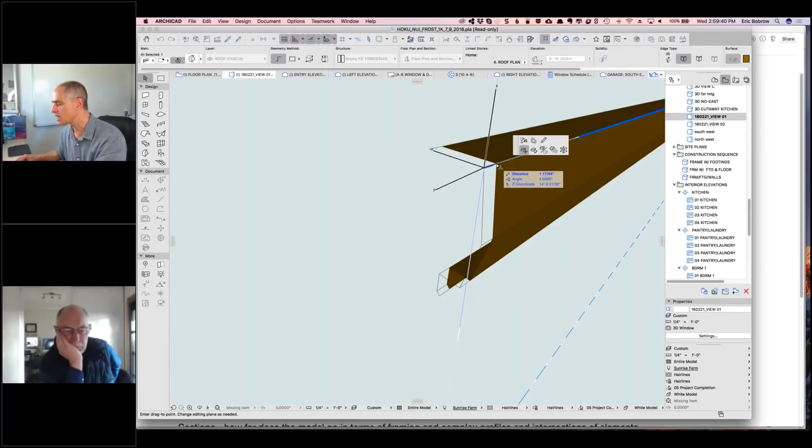I think we can also set up a guideline here, but I'm just going to point out that if I zoom out to where I can see the other end—yeah, so now you can see the other end, and I'll just take it along here. So you can see I just shortened the whole thing. So that's one thing, it's a little bit fiddly here, and this isn't the only way that you can do it, but I can do it this way.

Now let's say that I wanted a guideline. I believe that we can do a guideline in 3D. I haven't done this much, but let's see—let's create a guideline segment. Let's see, can I—actually, if I wanted to say create a guideline segment here, it's interesting. I've got this funny symbol of the eyedropper, although of course I don't see this. No, that's not doing it. See if we do this—I grab this. No, that's... okay, so there's a question. I know that there's a way to create guidelines that would snap to elements here. Now, if I put this back into the normal selection mode, maybe that'll—no.

All right, so I haven't done this much to remember, but basically what we should be able to do is select part of the morph and extend it along a line, in this case the 5-degree line. Obviously you saw I could make it shorter, but we'd want to be able to, at least in theory, make it longer. So that is something you could play around with and figure out the way to do that. Let me put it back into showing everything in 3D.

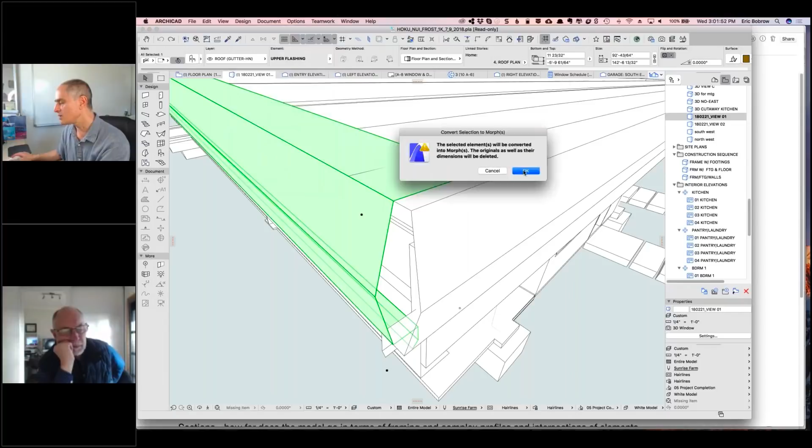Now, if we did want to clean this up, if we were to put this back here and take this element—and potentially, just my copy of the file—I'm just going to turn it into a morph. So I'll go to design, convert selection to morph. All right, you want to do this selectively because other than just undoing immediately, you can't turn it back into the other thing.

But we could potentially—I'm just going to demonstrate something very crude. If I go to that sub-selection, well, actually, I'll select the two morphs here, and I'll go to design, modify, morph union. What that's going to do is make these two into one morph.

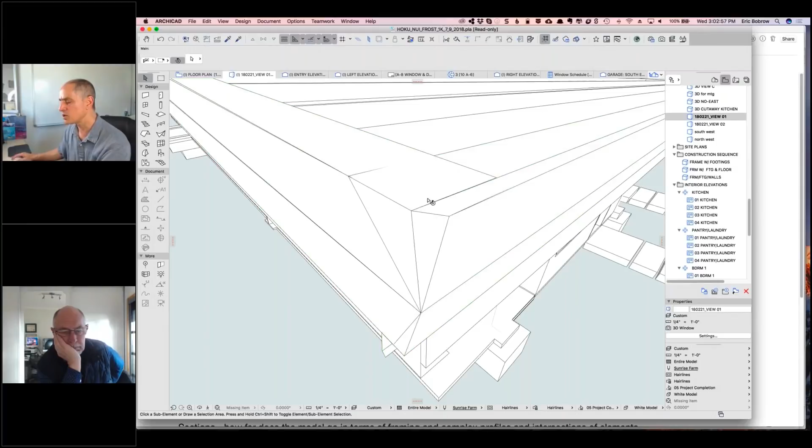And now if I select one of them, you can see it selects both. Now I'm going to do the sub selection—let's go to the arrow tool, sub selection here. If I select this point, I'm just going to drag this point on top of it, and drag this on top of here. There are some other points I may need to adjust, but basically this is at least a possibility you could experiment with. You might want to do it off to the side, make a copy of it, just practice until you can do it in the right context. Essentially, you could turn these into a combined shape that you manually clean up.

Eric, would it not be easier though to make them all beams, and then they would clean up automatically? Two beams will not clean up at the corner automatically. Even if I use SEO, I don't know how I would make the rake flashing out of a beam. No, but the beam—if you go into the beam tool, because it's now a beam, you can rotate the beam tool in two different directions. So you can certainly slope a beam.

All right, sure, so I'll just do a beam to show you, even with just the simplest rectangular shape. So if I take a beam here, let's go to our arrow tool, put it back to normal mode. Let me just make it shorter, and I'll make two beams here. Come on, I want to be back in the beam tool here. Now these two beams, if we look in 3D...

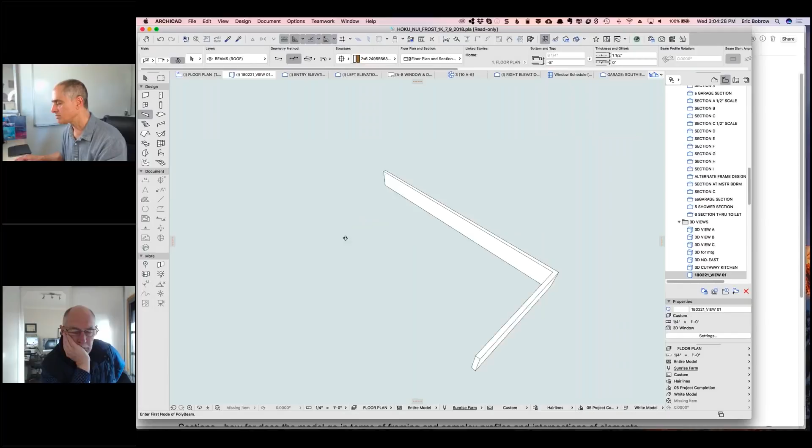They are cleaning up, just like walls do. Now if I rotate this up, so if I say it's going to be an angled beam, I guess we have to choose—where do you choose that? Go into the dialog box, you have to go into the dialog box to change it here. All right, so we'll put it at the 5-degree angle that you had. And now we'll put this one—I'll just drag the top of it up to whatever that happens to be. I missed it, whoops.

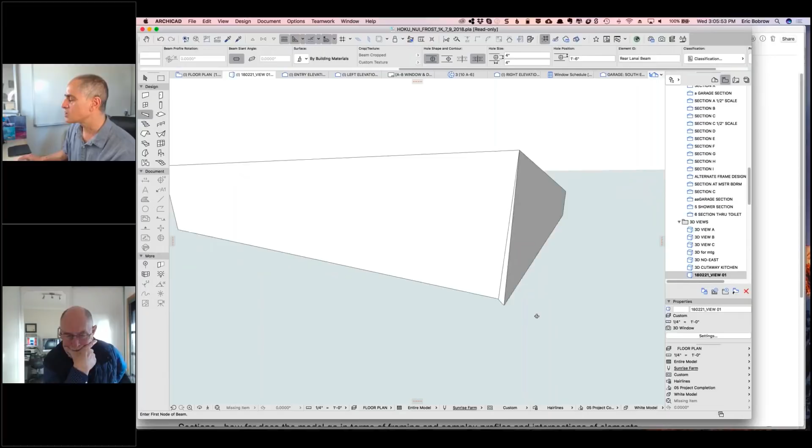That's interesting, okay, so right now it's done by the center point here. So if I take this, select both and intersect. If I take the two things and use the intersect, now you can see it's doing a mitered joint, and in fact this corner is working okay. But of course, when you tilt this, it's going to have a different dimension, and there are some other issues with this. So what my experience with beams going straight to an angle is that they will not necessarily clean up.

So using morphs is one option. The other thing you could think about—and this is a really interesting technique to experiment with—is you can use the railing tool, the new ARCHICAD 21 and later railing tool. The railing tool can have a profile, and it doesn't have to be part of a stair. It can simply have a number of points, and each node point can be moved to whatever height you want. Just think about a normal railing going up a staircase and then turning onto a landing. I've seen some interesting geometry that it'll actually clean up quite nicely. So you may want to at least experiment with creating a simple railing.

If you would just go to section G, so that I can show you what the profile is that the beam, that rail would want to be. Oh no, maybe it isn't G. Yeah, there it is. So just go to the upper right-hand corner, and you'll see those two shapes basically. Those are the shapes I'm trying to create, and that's my rake flashing. I've just put a 2x10 underneath it for what didn't show up, right. But anyway, so can I make that into a railing and go up my eave? Yeah, you can make a railing profile.

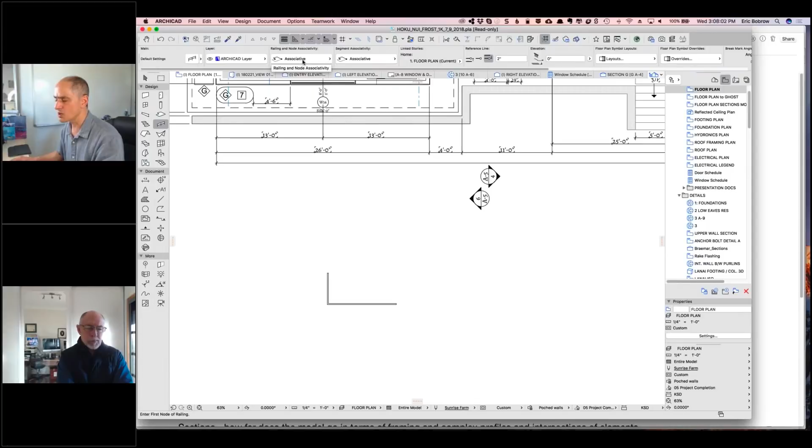We have the railing tool here. Let's go back to the floor plan, and I'm going to use the railing tool active. It's set up to associate to a stair or a slab, but I can draw in an empty space, and it'll allow me to draw these things.

If I select it, you can see it's static because these points were not attached to an element. Now, what is the shape of the railing? We have different options here. Right now it's a baluster rod, but I can remove the balusters and just have this rail. For our purposes, the difference between a handrail and a top rail won't make a difference.

Let's see, here's a profile, or what is it made of? Wood here. Now here's the profile, rectangle or round. But if we switch this from the built-in rail, okay, so right now I've got loaded...

What do you call it? Your project as a PLA, so I'm not even using the full library. But basically what you can do is have a choice of one that would be a profiled rail, and then you'd be able to choose from profiles.

If we go to the profile, I don't know if you have any profiles defined in this project, but if we go to options, complex profiles, profile manager, here's the beam you actually had in here. We say edit this profile. So this is actually what you were doing for another style, but notice where we have these choices here—we could say create something as a railing.

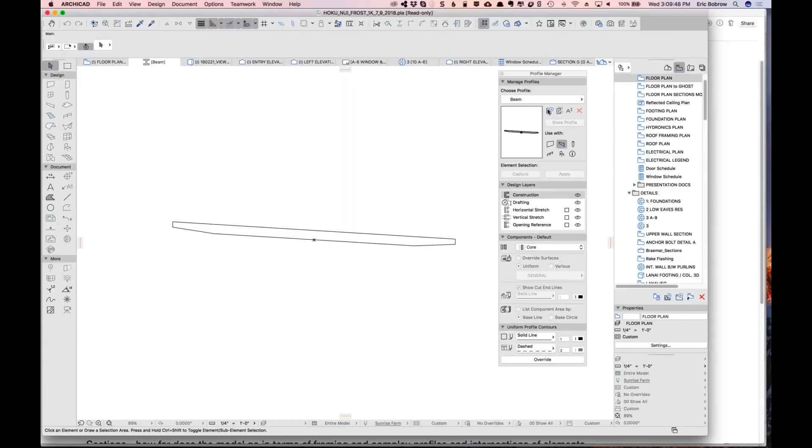So let's actually create a new one. Say new, and we'll just call it flashing test here. If we go to that, we're in the profile manager, but let's go to that section and see if we can zoom in on this. So this is the shape that we want, right?

So you did it with thick lines in this case. I'll just do that shape there. I'm going to copy this—grouped. If you get out of it and ungroup, it'll just group. So that's fine, okay, there we've got it, all grouped. I'm going to copy that, edit the profile, and paste into the center of the current view here.

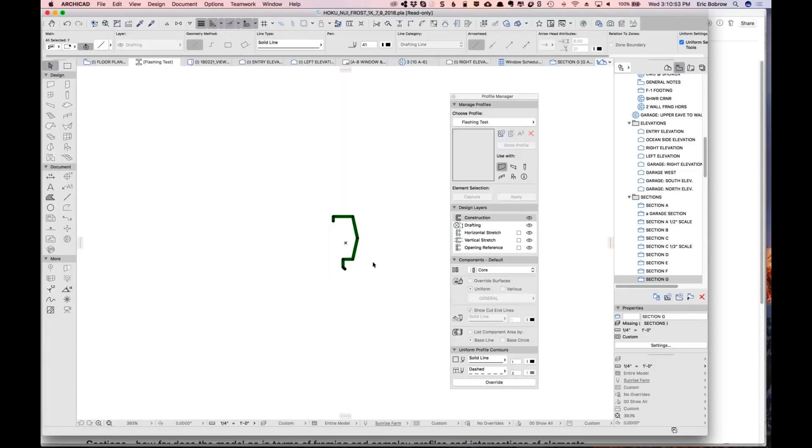Does it matter how thick the lines are when I make a profile, like if that's going to be a piece of steel? A profile will not be usable unless it has a fill with some thickness, so lines will not create a profile, although I can use it as a starting point.

Now I'm going to go to the on-screen view options and turn off true line weight, so we're looking at this. We're going to drag this point up to here. This is the point we're going to be drawing along, so it's possible I'm making a guess that this might be a more useful reference point along this face here. But regardless, whatever that origin point is, is where you're going to be drawing.

Now this is just a series of lines. What I'm going to do is use the fill tool and magic wand these lines. You can see it didn't really give me what I wanted—I need to take it down to these points. In fact, I need a uniform thickness, so what I need is to offset.

So let me get rid of that. We'll go and select all these lines. Here's an interesting little trick—I'm going to unify them. When I unify them, it's not letting me unify in this view.

That's all right, I'm just going to copy and paste them, so I've now got two sets of those lines. Undo and redo—now what that did is, if I just drag this away, we now have two copies, and this one is selected here.

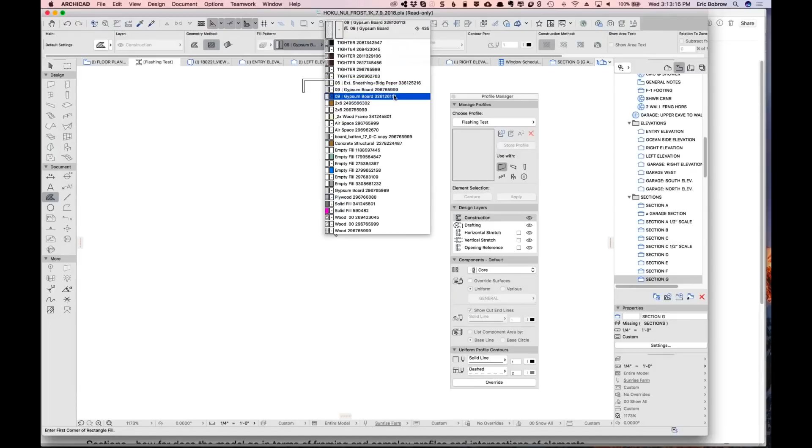So now I have a contained shape, and I'm going to go to the fill tool, set it up for what it's going to be made of. Now it's going to be some type of a metal, but I don't see anything in here, so I'll just do something arbitrary since I don't know exactly what it is, and I'm going to magic wand this. Now when I magic wand it with the space bar, it's created a fill.

And this is a flashing test. I'm going to store the profile after saying that I want to be able to use it for beams and railings, and well, probably don't need to use walls. I'll just say store it, flashing test. So here now it's defined.

So now if I go back to the floor plan and we go to the railing here, we don't have the option in terms of choosing that because we're using the limited library. Maybe let's just check the top rail. Can't you just add in the 21 library, Eric? All right, well, I'll tell you what, let's add the library.

Go to the library manager and say, in addition to the PLA, we're going to just add in the standard ARCHICAD 21 library. So this is ARCHICAD 21 library, choose, okay. So that'll give us access to that. We'll probably get some duplicate parts and things, but we can ignore them.

So Dan Wyckoff says a little GDL and a profile works wonders. GDL can be great, but we don't need it for this purpose.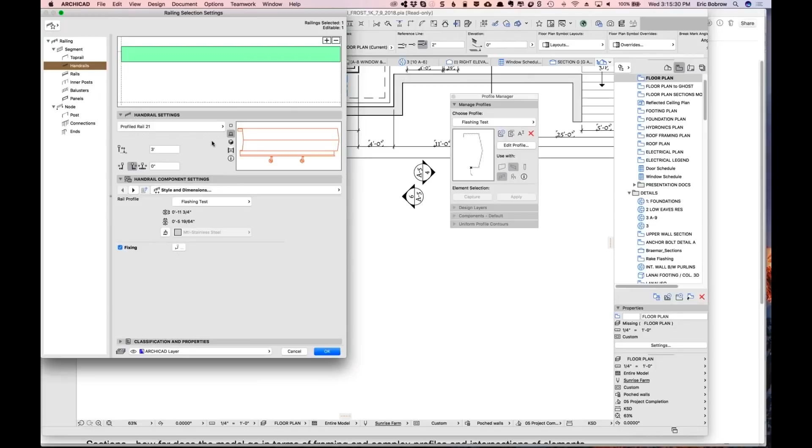Let's get rid of the balusters. So now it's just going to be this railing here, the handrail. And we're going to say no, it shouldn't have any attachments. These are, you can see, little things for banister, so we can say no fixing there. So now here's what we've got. Let's say OK. Now let's take a look in 3D at just what we've got there.

Oh, and we need to get rid of the posts. I didn't pay attention to that. So this is post, or let's see, segment, inner posts. We don't have a minus there. Node. Actually, if I go to the railing as a whole, how do we get rid of the posts? Right now, I'm drawing a blank.

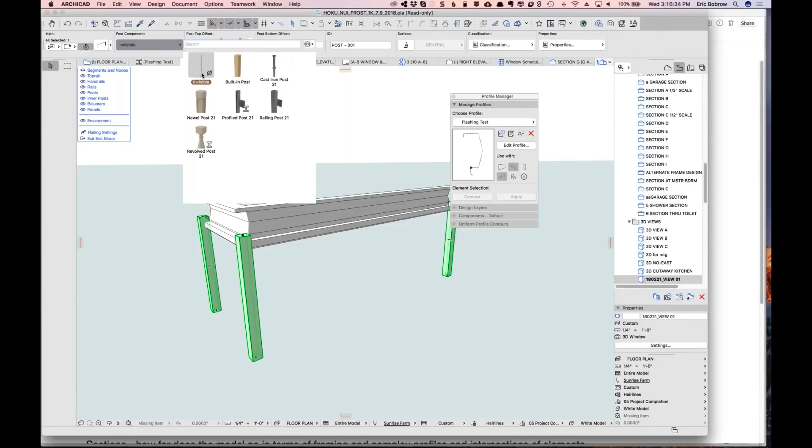Let me go and say I edit it, and then I'll select these three posts and say that I want them to be, instead of built-in posts, to be invisible. So they basically will disappear. So now the lines are just sort of selection things, but they won't actually show up when I exit edit mode. They disappear. So now we've got this shape.

Obviously it's cleaning up. Now it should go the other way because it's facing the wrong way. So we'll go to the floor plan and I'll just reverse this line. I'll just take this point here and pull it down there. And we'll go to 3D. And now we've got this.

Now, if I go here to edit this, and I go to nodes, and we select this, we should be able to change the height of it. In fact, let's just take the whole railing settings and say that the segment has a 0 height, because we really don't need to have that.

So now, if we select the node, I'm just going to drag this up. Now you see what it's done here is it raised that up, and we'll take this one and raise it up to the same height. So now, well, it's not cleaning up, unfortunately. It was a noble effort.

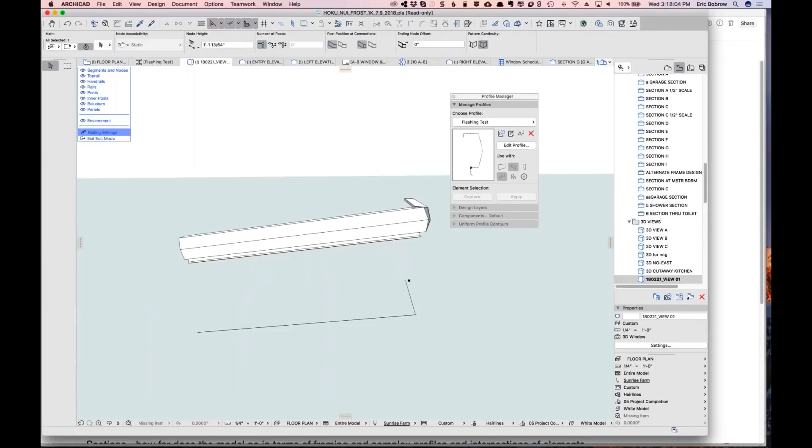We are getting the rake. We are getting horizontal. It's probably better than what you did and more easy to manipulate, but it is not automatically cleaning up this corner.

So it's not going to handle it as gracefully as we might like, but it definitely is going to be easier than what you were doing. Once you've defined this shape, you can literally just go to the railing settings.

Would it make any difference if you actually took that profile and started from scratch and made the handrail to the angle? It wouldn't clean up any better, would it? No, I don't think so. But here's the other thing.

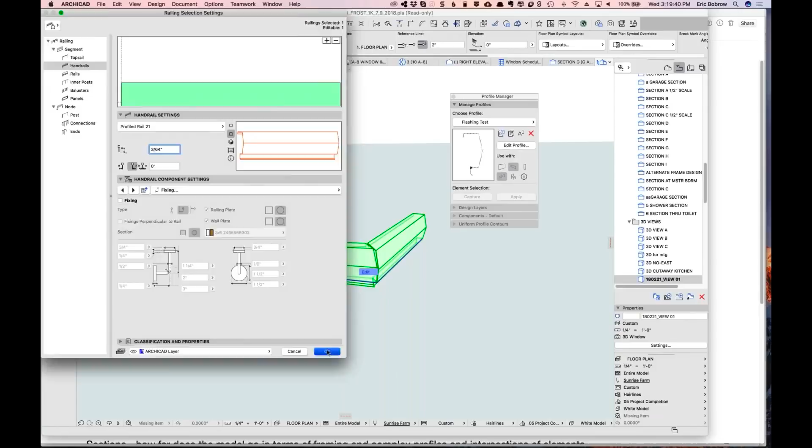I just want to say that the height should be locked into the line. So now you can see what's happened is I no longer have that distance there. I've set it up so that whatever I'm drawing is right at the 0 mark, or I put in 0 and it took it up a little bit. I'm not quite sure, maybe it has to do with the fact that profile was set. Remember, I had that slightly higher, I was putting it there. But now you can see that the points I'm actually able to see in blue are the edge. So that was the original point you put in.

Yeah, so basically what we can do is once you've got this set up, you can just define that you're going to put in a railing, and you can just put it along points in space, and it will do its best job when you edit this.

If we say allow me to see the segments, and let's see, actually I guess if we turn off the railing, now I can go here and I can literally just go and modify these points, and then when I turn that back on, we're going to see what that's doing.

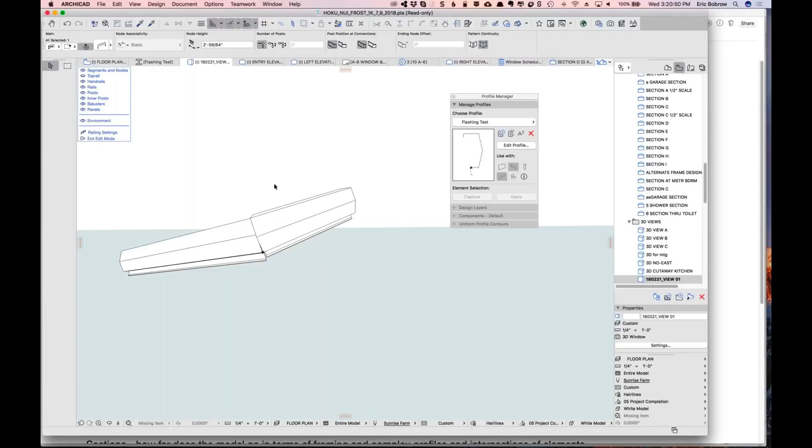So I'm obviously stumbling around here, but it's something you should at least explore, because it will be a very quick way to just get the basic shapes. And yeah, the corner is still not cleaning up. That's why the morph option at least is one possible thing.

But if you think about it, this is a pretty complex relationship. You may have to just actually create a cover or something that would trim this off, because the distance when things are on an angle is different than when they're horizontal.

So it was a noble experiment. I think you can take it a little further, Dean. No, I appreciate that path. Yeah.

Let us take a look. So we are well past the 2-hour mark, which was sort of my original target. So is there anything else that we haven't looked at in your project that would be particularly interesting?

Interesting, no, that's pretty much the most unusual challenge that I had on the project, those factory flashings that I struggled with. In general, I'm wondering how people do ghost plans, like showing my floor plan on my foundation plan or on my roof framing plan. I explode my floor plan into lines and make them dash.

Thank you, Richard. No, have you got the Killcare one open at all? I'll show you quickly, just in one instance, how to do that. You know, I have Nundah. All right, so let's just, if I switch over to Nundah, because that's using the same version of ARCHICAD, and we say kill. So yeah, I think it's, so your kill, what is that? Yeah, that's the one, that'll be the, well, Killcare. Okay, so we're going to open that.

So Rich, we're going to open this, and then you're going to say how you just go to the site plan, for instance, on the layout site plan. By the way, comments, as long as we're going in here.

So Ken Brooks says it will not clean up in actuality, the mechanic in the field will not be able to. Let me, for some reason it's just... okay, so here we are, go here. He's pointing out that it's going to be hard, a sheet metal guy won't be able to join those two elements in a manner to clean up, so that is an issue. David Proctor says, in fact, with these types of flashing intersections, the geometry, the forms cannot clean up.

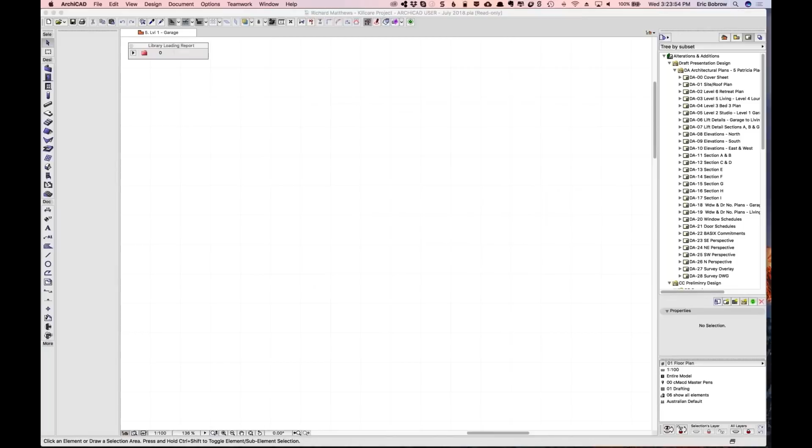So ARCHICAD can't clean it up in part because the geometry is going to be a challenge. Jim Schlegel says, for metal buildings, we've created a series of corner caps, since that is a way to handle it.

Let me just select the DA01 site and roof plan.

If you just do a big selection over everything on the sheet, you'll notice how many frames there are on the actual site plan itself. You can see there's 1, 2, 3, 4, 5 different frames, and those are taken from the separate stories. So what I've done is created a special layer, sometimes just one, but sometimes more than one, to show only those things I want to see on a lower floor.

So the main big one is the roof plan of the main building. Then there's basically the ground floor with the garage. Then there's what I call the studio level, the next one up, where you can see the planter box showing through. And then there's the retreat up in the left hand corner. So all of those are laid in there and then organized.

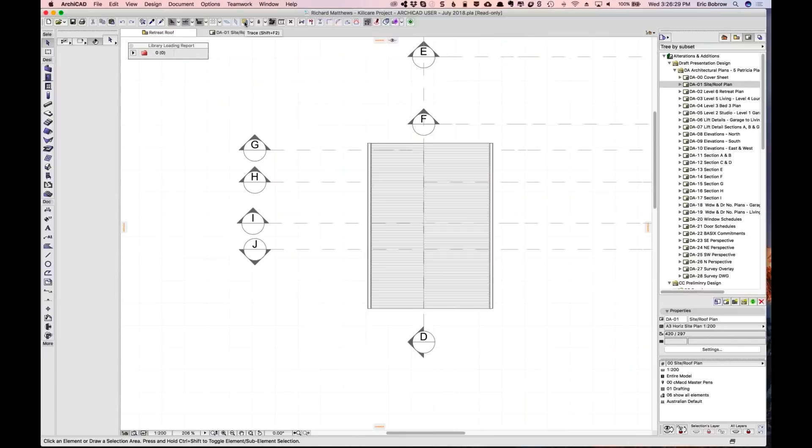So here's a view that is shown now in the context of the layout. If I go back to trace and reference, we can use this palette here. If I switch back to the layout with this view, so this is one drawing.

So if we select all, I can see all the different drawings. If I go to this drawing here, say open this one with the layout as a reference. So this is, and then I turn off the reference just for clarity.

So this is what we're seeing on that particular story. When we look at it in the context of the layout, it's being placed on the layout with certain information. Now, when I look at a section, you can sort of see how this building is constructed. It's on a very steep slope, so therefore I need to have all these different layers.

Let's just take a 3D view instead, because that's one of the things I'd been planning to show. This is obviously a very challenging context where you've got so many different levels. So that top-down view of the site plan makes it look flat, so that you can see the relationship of things, but really each one of these views comes from a different story level.

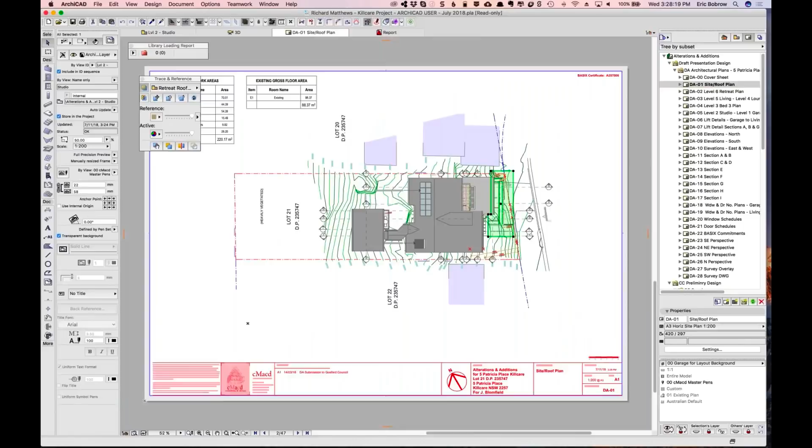Okay, that's interesting, I'll try that. Thank you. So for split levels, you can do it even for the same story. Let's say the second floor has a split level. You can have potentially more than one view that makes up the second floor, depending upon how different in height they are. Otherwise, windows and doors may show up in strange ways.

But here we have a great example of a synthesized view, which follows symbolic conventions for what you would want to see on the site plan, but it definitely is not story based.

Just quickly, Eric, I have another project with 5 different levels - it's 26 units on a sloping site, and that's a very interesting way of how I stack that. I won't get into it now, but we might want to discuss that at some stage. It was a big challenge trying to show floor plans and everything together on the ground, and I've managed to come up with a system that makes that very easy and very clear.

Okay, well perhaps we can revisit or take a look at that in another session. So, Dean, anything else that would be good to look at in your project?

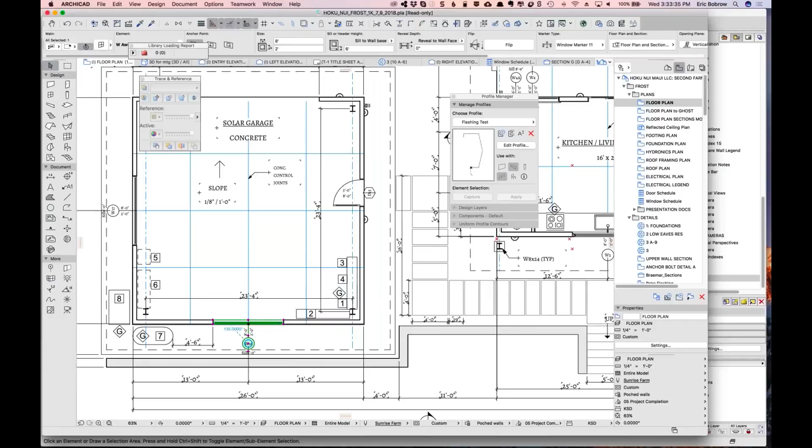Okay, so in terms of the markers, let me deselect it. If I select the window, it's selecting the window and the marker. The marker is integrated into the window, and of course, in the window settings, we have marker settings.

This is an 11 window, okay, that's fine. I mean, what I usually do is I just put my cursor in the middle of the window number, and I can drag it in two directions, and just kind of place it exactly where I want it. But in 21, I can't do that, and we can find another window in this project that has a...

Okay, AC21 window. When I moved it, you can see that this handle is, or maybe it's this one here, we're moving some things, but they're sort of separated. Yeah, so it's a little buggy. Now this is, of course, your window, your 11 window here in 21. It certainly has some issues.

Let's take a look. If I were to go to change it from the dimension marker here, from the window marker 11 to the window marker 21 here. Okay, so obviously it looks very similar. We'll just say okay. Now it does have some issues. You've got the background fill, this is using a fill, you've got an old project and the fills have come across in a funny way. We'll just go and say the background, let's see.

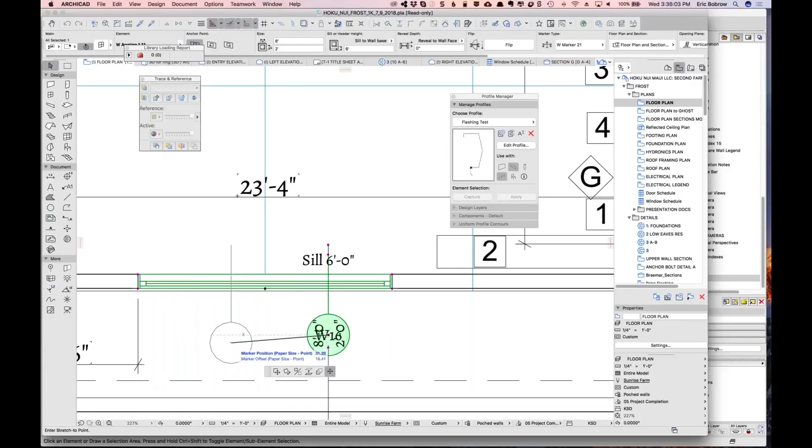But now if I go to this one here and say I want to move it, we can move this around here. Now the line work, I'm not sure what we want to do here, but we can move that. And the numbers, we can see that there are two hotspots and I can move them around. So this seems to be working pretty well in terms of just being able to.

It does actually. Yeah, that seems to be working fine. It's actually, yeah, I'll look at which window label setting I've got.

It's my AC21 windows, which I have a problem with, but I'll experiment with some of those. Without even looking at my windows, is there a best practice for window marker settings that I should think about? That's really my question, I guess.

Well, there are a variety of different styles, and certainly there's no best practice in terms of, do you want it to be a circle versus another shape? Do you want it to have a line through it or not? Do you want to have this information, the size, on the plan or not? I mean, people prefer different things.

What probably the one best practice I would say is once you get a style that puts it nominally a good distance away, nominally the right size, the right font, etc., you'd want to save it as a favorite. Now, unfortunately, favorites—while you can set a favorite for a window or a chair or a wall—we can't set a favorite for the dimension marker separate from the window.